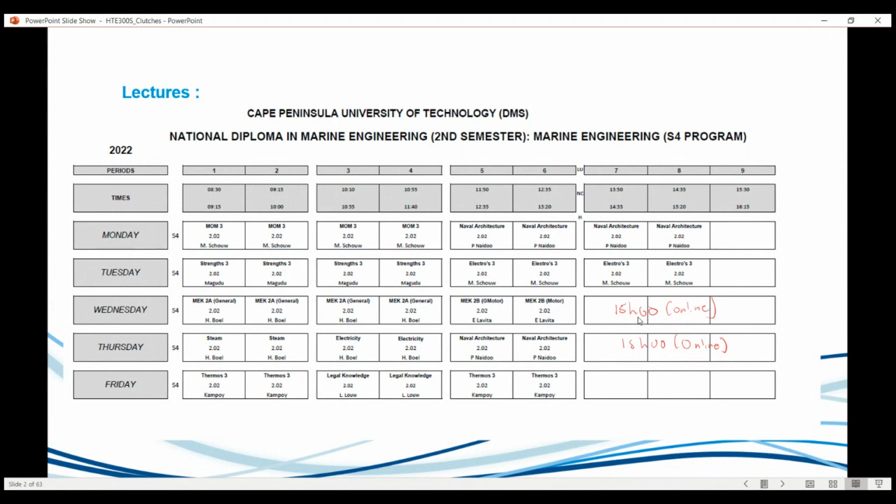My consultation times for our repeaters: Monday after class you can engage with me on WhatsApp, email, and I can assist you. So try to work ahead, if you have a problem or two, you can just send it to me. We can discuss on Tuesday, that's in the mornings. I should actually sound available that day because I use the morning sometimes for prep. Wednesday and Thursday is from 12 to 4 as well.

Friday I'm unavailable. I should actually put unavailable on Tuesday. But nevertheless, you guys should always pop my WhatsApp and I'll respond. Even on the bloody weekends you guys still bother me, but please try to respect my times. Always just send me a WhatsApp if you're battling with anything, I'll attend to you probably during those times.

Okay, so for the guys who weren't here last semester, hi, Mr. Sima, good to see you.

Just a reminder to let you guys know what we covered - 7 topics, and it was quite dense, a lot of concepts being thrown around. We did inertia, systems with friction, relative velocity, centrifugal force. We looked at conical pendulums, governors, balancing, vehicle stability - a lot of basic stuff - and mass moments of inertia.

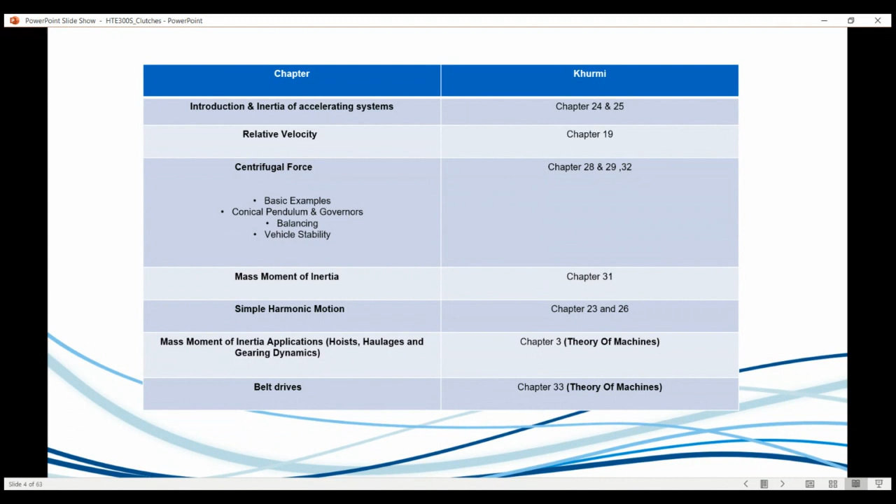So Heat Engines 3 is essentially a continuation of MOM 3, but at the same time it's the second half, which rearranges things a bit. It incorporates small concepts from the previous semester. For instance, in shafts, you'll be using - which I'm quite excited to teach because it wasn't part of the syllabus I did last semester - you'll need to do your shear force and bending moment diagrams, and use your torsion equation to find the diameter of the shaft.

For instance, in energy systems, it requires you to know rotational hoop stress, which is sigma equals - a function of the density of the material and the velocity squared. If you guys recall that in thin-walled cylinders. Inertial forces incorporate some thermodynamics as well, and some stuff on machines.

There'll be no really finding mass moments of objects. Typically at this level, mass moments will be given to you as a value, assuming you understand what it means - in the context that something with more rotational inertia or mass moment of inertia will take longer to rotate. When you do analysis, it'll give you an idea.

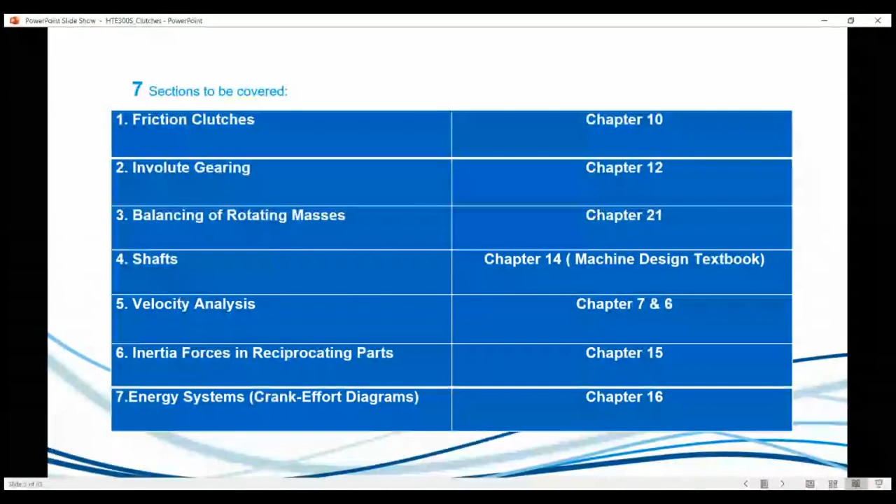Recommended textbooks - I've shared this on Blackboard, the Theory of Machines one, and the N6 textbook from Peter Toit. I've shared the relevant sections there for you. There are other recommended textbooks that all deal with theory of machines, so you've got the whole textbook there. If you like a hard copy, I recommend printing out the individual chapters of the textbook I've sent, or this one, and put it in a lever arch file - that's what I'd recommend if people really want a hard copy.

I'll be talking for too long, guys - you know, we work here. Cool, so that's that, I think that's kind of clear.

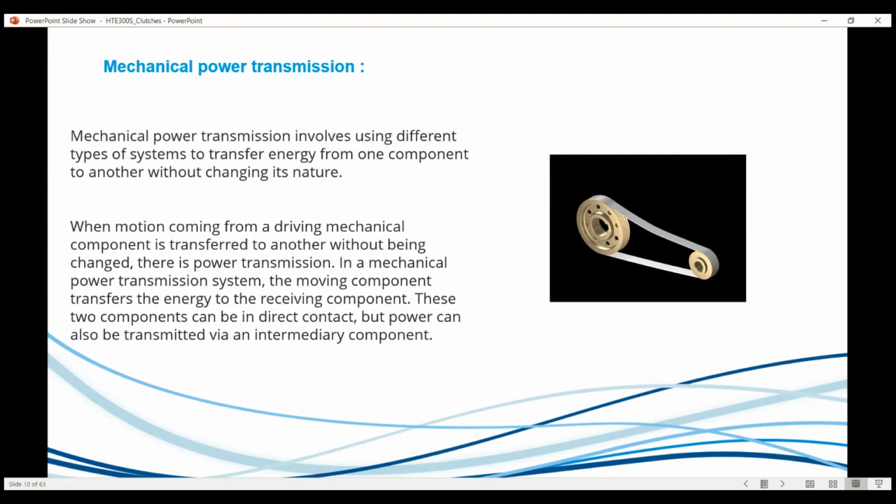When motion coming from a driving mechanical component is transferred to another without being changed, there is power transmission. That's the idea - we're transmitting power in the mechanical power transmission system. The moving component transfers energy to the receiving component, for instance the pinion and the gear wheel, or the smaller pulley to the big pulley. These two components can be directly in contact, but can also be transferred by intermediary contact - in this case, the belt drive acts as the intermediary component.

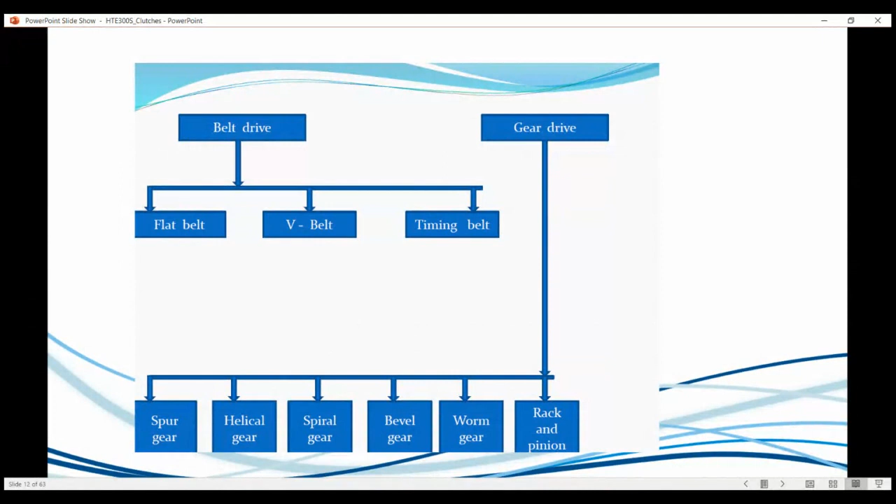So classifying and breaking it down further: transmissions or mechanical drives - positive drives where no slip occurs, such as chain drives and gear drives, and frictions where you've got belt drives and ropes. Belt drives can further be broken down into flat belts, V belts, and timing belts - that forms part of flat belts. Then on gear drives, you've got a whole range of types of gears, which I don't think we're looking at all the different types, since this isn't a gear type course, but anyway, that's under that.

So just to give you an idea of what all of this is, before I go into all the theory and how we model the stuff, I'd like to ask all the experienced engineers, and maybe not so experienced engineers - have you guys worked on clutches? Is clutches important in a marine engineering domain? What is your experience with clutches as a marine engineer? I'm opening the floor to anyone.

Mr. Plachis, do you want to go first? Or Mr. Zita? Who's worked on clutches? Mr. Beard, Budalalo, Mr. Sima - anyone? You guys know what a clutch is? You haven't seen a clutch before?

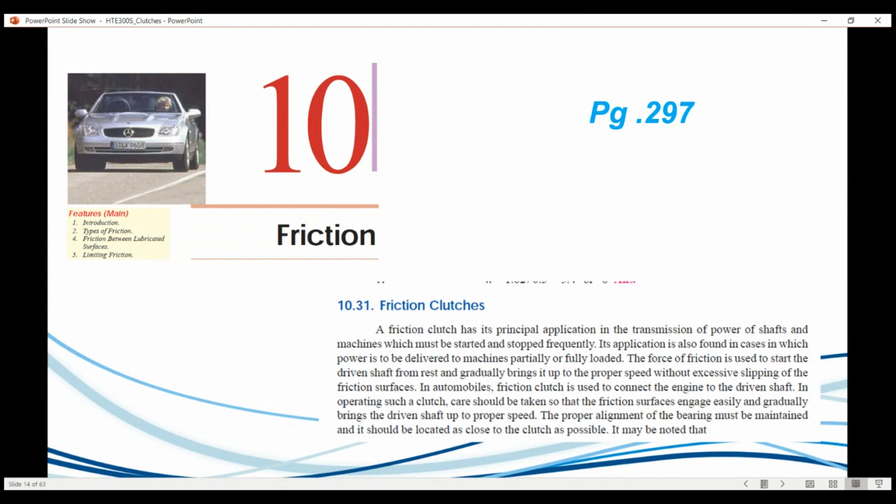Okay, so in your textbook, shared on the blackboard, it's chapter 10, and you have to go to page 297 where it starts on clutches. So that's if you want to follow along, because I've kind of gone with that flow. Not really, but yeah, that's the text.

Yeah, this is some images. Okay, so what is a clutch? I think I'll refer back and forth to these things.

A clutch is a device used to transmit torque. So just like I mentioned in the introductory part, it's all about mechanical power transmission, and it's used to transmit torque between two co-axial shafts. It enables the shafts to be engaged and disengaged while at rest or in relative motion.

So basically, what this means is you could have on the engine side the flywheel rotating at a specific amount of torque at a different speed, and then the driven shaft on the other side. Basically, the clutch is intermediate between the two elements to make them rotate at the same speed, and it transmits the torque.

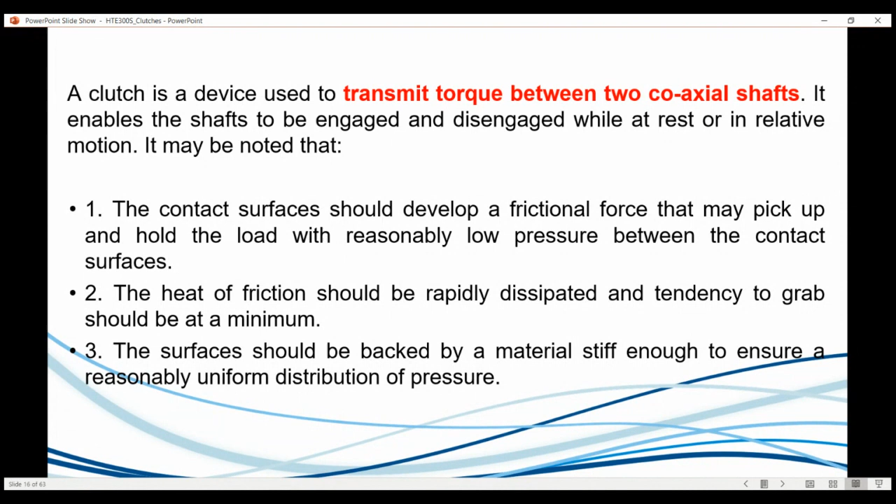Nevertheless, for this to happen, the contact surfaces should develop a frictional force that will pick up and hold the load with a reasonably low pressure between the contact surfaces. The heat of friction should be rapidly dissipated and tendency to grab should be minimum - we don't want too much heat. And the surfaces should be backed up by a material stiff enough to ensure a uniform distribution of pressure.

Some more definitions on this. Okay, it's just like a gear train moving back and forth, engaging and disengaging. A clutch is a machine member used to connect the driving shaft to the driven shaft - again, with the engine side and the flywheel, and then the driven shaft on the other side.

So that the driven shaft may be started or stopped at will without stopping the driving shaft at all. So we don't want to stop the stuff - one will be rotating and we're able to make the changes. A clutch thus provides an interruptible connection between two rotating shafts. Hence, it's a key element in changing gears.

Clutches allow high inertial load to be started with small power. That's quite interesting. And also, a popular application of clutches is in motor vehicles, where it's used to connect the engine and the gearbox - that's the primary form of a clutch device now. But in more modern electric vehicles, they've eliminated transmission completely, and that's why mechanical engineers in the automotive industry will lose their jobs, because we work with motors basically coupled to the wheels now, and we directly control the motors through VFDs, variable frequency drives, and there's no need for transmission anymore.

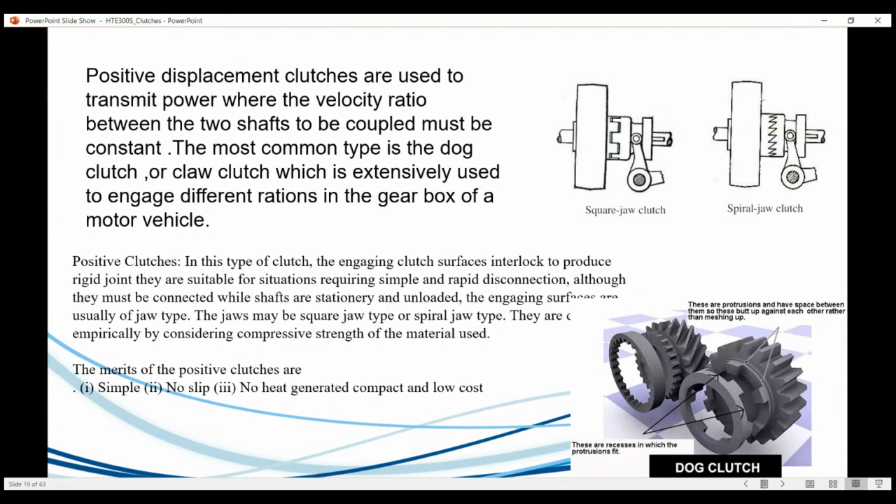Just for noting really what a positive displacement clutch actually is, but we'll be looking at the friction types instead.

So friction clutches, like I mentioned, are classified into plate clutches - single and multiple - which we'll be looking at, cone clutch, thought of throwing that maybe in there, I'll see how it goes, and then centrifugal clutches, which we won't be looking at but I'll mention again. It's also part of the syllabus but it's kind of overkill. Then there are two different parts, which I'll talk about now.

So two shafts not running at the same speed. What's going to happen with the clutch is that slipping will occur between the two shafts when the clutch engages, until they're brought to the same speed. Super important thing to understand because we're doing the maths behind this. Once this happens, torque will be transmitted, and then no slip occurs unless the limiting friction force between the surfaces is exceeded, which typically doesn't happen, but it does happen sometimes - that's when you hear your clutch slipping.

So one thing to keep in mind: we're going to look at the analysis of a clutch individually, and then we're going to look at it holistically from a mechanical dynamic perspective, where we incorporate the inertia and stuff - that's the fun part, which I like. So two different shafts rotating at different speeds, different torques - the clutch basically marries them together. Some friction occurs, some slip occurs, and eventually it doesn't slip, and then eventually they all rotate the same, in harmony.

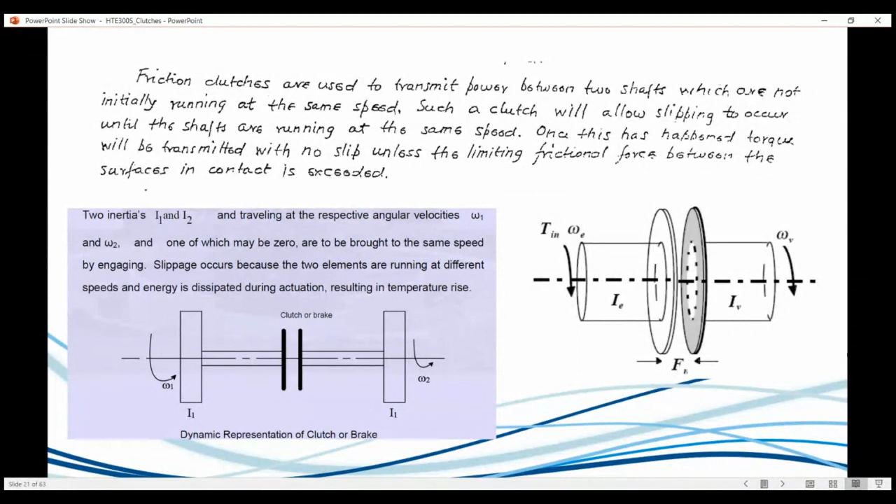Okay, so again, this construction of a clutch, just to get people aware of this before we get to the maths. The clutch has essentially three parts: the flywheel - the engine flywheel - obviously everyone's aware what the flywheel does, it provides energy. We're going to be looking into flywheels fairly in depth, not only for automotive but also for marine type applications. It provides energy during certain strokes when there's no energy - this work is only done during, for instance, the expansion stroke, and there are parts where it balances out the work fluctuation. Nevertheless, there's also the friction disc, called the clutch plate, and the pressure plate.

This says when the engine is running and the flywheel is rotating - so the flywheel rotates with the engine, that's how it's typically done - the pressure plate also rotates, which is attached to the flywheel. The friction disc is located between the two. When the driver pushes down the pedal, so when you're pushing down your clutch pedal, it's released, and the action forces the pressure plate to move away from the friction disc. Then there are air gaps in between the flywheel and the friction disc, and between the friction disc and the pressure plate as well, and then no power can be transmitted - that's when you're pushing on the clutch.

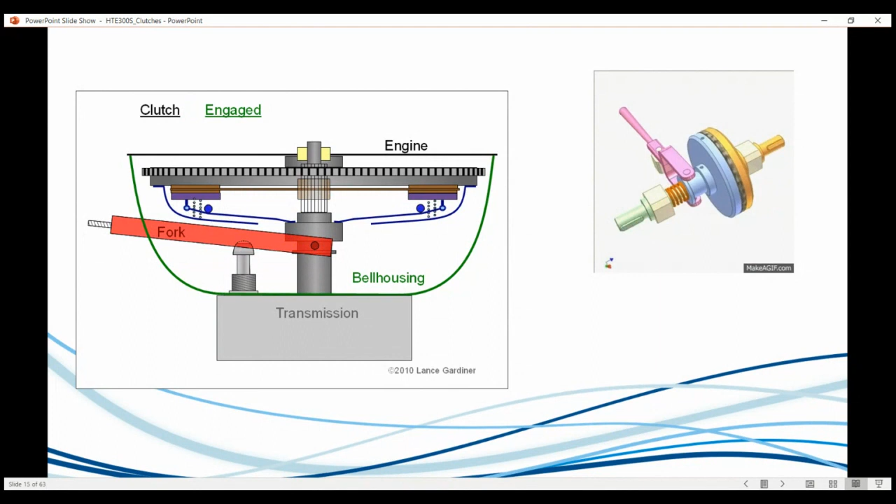This is just showing when it engages and disengages. Looking to one side, that's when they go apart, and then that's when they come together. So that's a very basic illustration of what's actually happening there.

This is what the system looks like from the side, where you have your driving shaft and your driven shaft on the one side. The driving shaft is always from the engine side, put at its own torque, at its own speed. Flywheel's there, and on the left hand side we have the disengaged part of the clutch, and on the other side that's where we engage the two together, and that's when slip occurs, and eventually the torque can be transmitted from the driving shaft to the driven shaft. That's what should be running through your mind all the time.

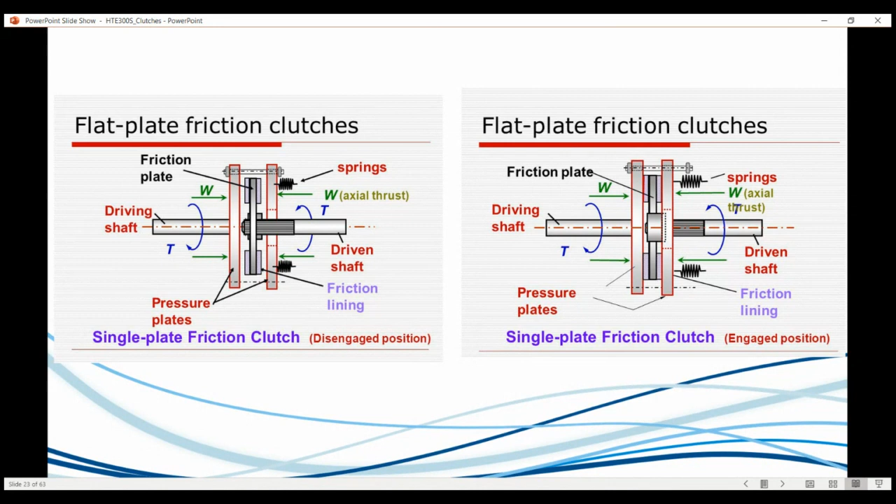There's an axial force, or axial thrust as I say, which is being produced essentially due to the springs. The springs transmit that force coming through there. We will be doing some analysis on that.

Okay, so let's get to the fun part. We're going to start doing some calculations. The method of analysis, which is essentially the core of this course, is: torque can be transmitted by a clutch, and it's a function of geometry, the magnitude of the actuating force applied, as well as the condition of contact prevailing between the two surfaces. The applied force can keep the members together with a uniform pressure over the contact area, and its consequent analysis is based on this uniform pressure.

In fact, there are two types of theories we're going to look at: the uniform pressure theory and the uniform wear theory, just to give you an overview of what's happening.

The first theory - I want to use the word 'new'. So when you buy a new clutch and you insert it, the prevailing theory would be the uniform pressure one. What does the theory state? You're not going to tell me in words - you'll be using calculations for this theory - but it's just the idea so you can understand what it means. So the uniform pressure theory assumes that the pressure is distributed uniformly over the frictional surface, the surfaces essentially in contact.

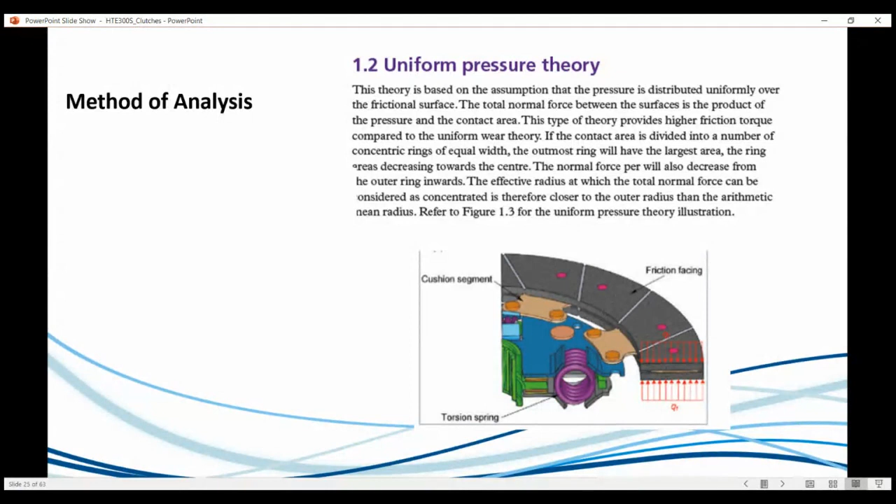Okay, the other one is the uniform wear theory. In this case, assuming that the fit between the contact surfaces is perfect, the normal intensity of the pressure will be equal at all points of the contact surfaces. This theory is relevant to worn clutches because wear is uniform over the contact area from the inner radius to the outer radius. So when we're dealing with old or worn clutches, this is the theory. Some of you haven't done your service yet - if you want to see how much torque you're producing, you have to use the uniform wear theory.

And essentially what it means, if you look at the sketch at the bottom, is that the pressure is not uniform across the whole thing. What's important to note is that the rate of wear between the contact surfaces depends on the intensity of pressure as well as the velocity of the rubbing between the surfaces. Basically, the wear is a product of the normal pressure and the rubbing velocity.

This implies that the maximum pressure occurs at the inner radius, and they say P times R equals C. So for this theory, the pressure is not uniform and it varies from inner to outer. What's important here is that if they don't state which theory to use in your analysis, you have to use uniform wear. I typically tell you which theory to use.

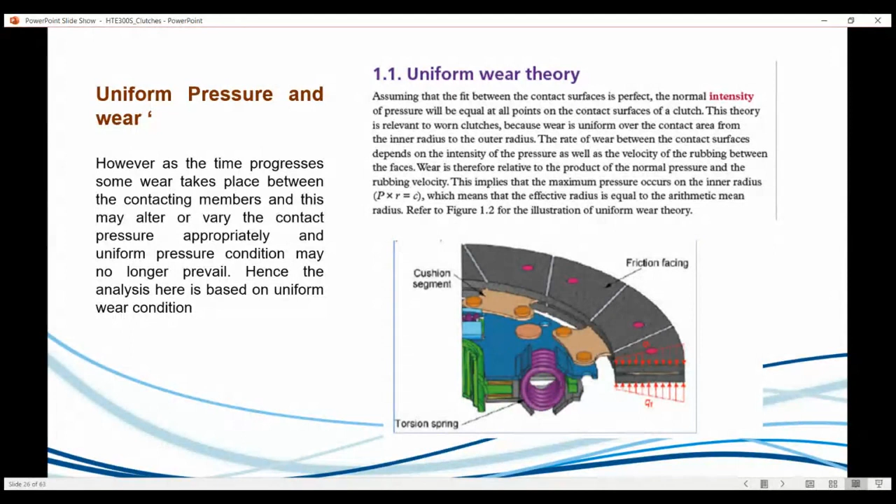So this is the other theory. They say however, as time progresses, some wear takes place between the contacting members, and this may alter or vary the contact pressure appropriately, and uniform pressure condition may no longer prevail. So then that's when we use uniform wear. That's just back to the two types.

Okay, get into the analysis part now, the equations and all the fun stuff. So what you have to master is these two theories, then obviously apply them. First thing is first.

To calculate torque on the clutch, we use that formula at the top, which is N, the number of frictional surfaces, mu, the coefficient of friction, W, which is the axial thrust, and R, some mean radius. So that is a general formula for torque transmitted of clutch.

What changes is W and R depending on which theory you're using. I hope that's clear, so I'll say that again. The general formula for torque basically is W times R, which is essentially force times radius, times N times mu.

And what changes depending on which theory you use is, whether it's uniform pressure or uniform wear, the W and R. So what do I mean by this? For uniform pressure, to find the mean radius, it's 2/3 times R1 cubed minus R2 cubed, which essentially means outer radius minus inner radius, all cubed, divided by outer minus inner squared. That's the first thing.

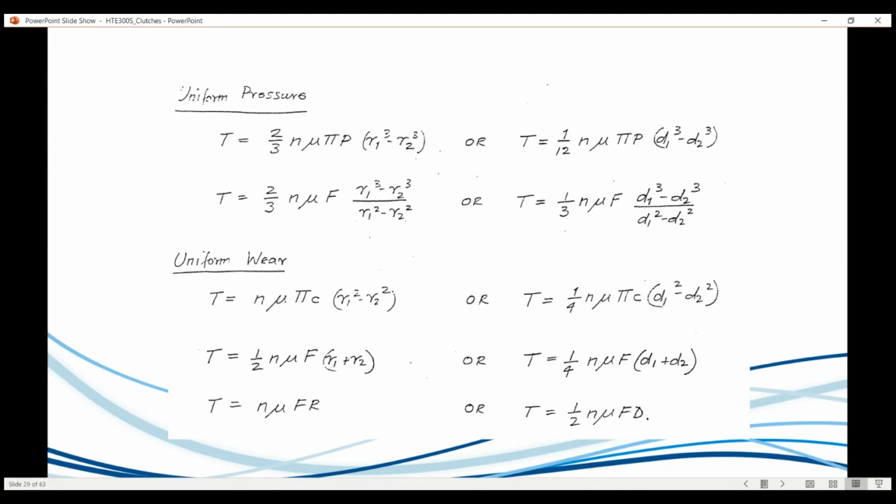I mentioned this to you, so I'll demonstrate this. These are additional formulas - you don't actually get them, but I modified them to make it a bit easier to use. I don't typically use them because I remember the older ones, but these make things simple for you to remember. You can calculate the torque immediately if you have all this. They basically arrange diameter and radius, or radius and diameter - I think we can see that there.

Anyway, let's hone in onto clutches, right? So we've talked about what a single plate clutch is: pressure plate, flywheel, clutch plate.

Let me just read this to you. Basically, it's a friction material, usually Ferrodo. I'm sure you guys have seen it before. It's mounted on the hub, which is free to move along the splines of the driven shaft, so it can move back and forth. The pressure plate is mounted inside the clutch body, which is bolted to the flywheel. Both the pressure plate and the flywheel rotate with the engine crankshaft, and all of that has its own inertia, or the driving shaft.

The pressure plate pushes the clutch plate towards the flywheel by a set of strong springs, which are inside the body - we can see that over there. Typically there are 2, 3, 4, or typically 6 springs. Those springs, we'll find the magnitude of the force within those springs.

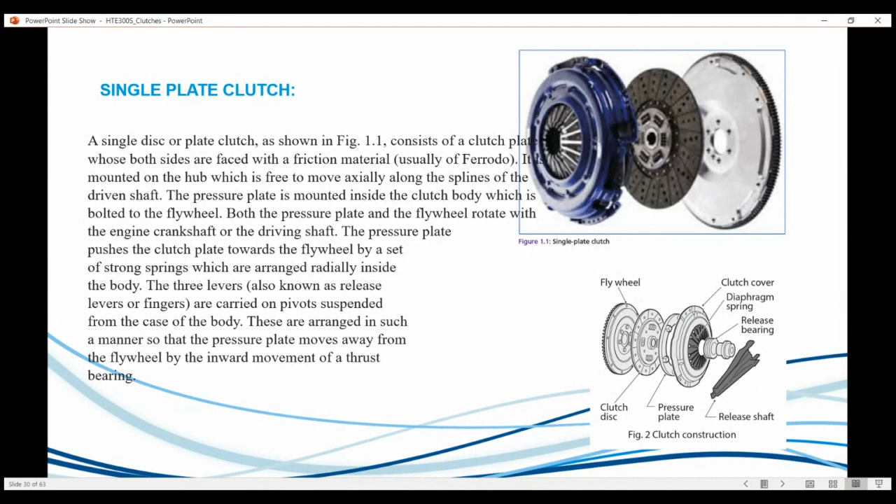And the release levers, or fingers, are carried on pivots suspended in the case of the body. These are arranged in such a manner that the pressure plate moves away from the flywheel by the inward movement of the thrust bearing - the release bearing I was talking about. You can actually use the same formulas for thrust bearings and things like that, but nevertheless, that explains the bearing moving back and forth.

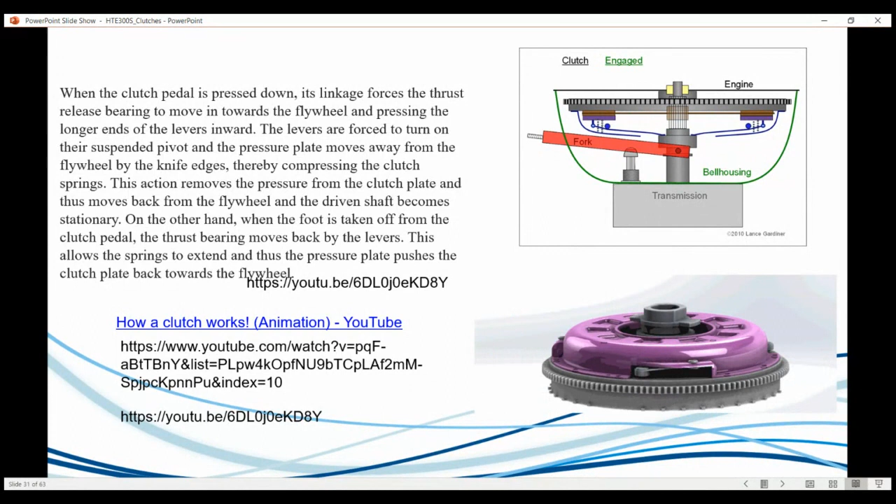I don't want to talk too much - we can always come back here if we need, but we get a general idea of the bearing, engaged, not engaged, that kind of thing. That's what's happening. Flywheel, clutch plate, pressure plate, all together in one assembly. I've left some links for some YouTube videos you can have a look at. I think I explained it adequately, and we can carry on.

Yeah, so the last note in terms of words and stuff - let's consider the clutch plate. This is in regards to the surfaces. It consists of 3 plates: the flywheel, the friction plate or clutch plate in the middle, and the pressure plate. There are 2 pairs of surfaces in contact: one on the flywheel side, on the clutch plate side, and the other side is one on the pressure plate. Depending on how many plates we have, we can work out how many surfaces are in contact.

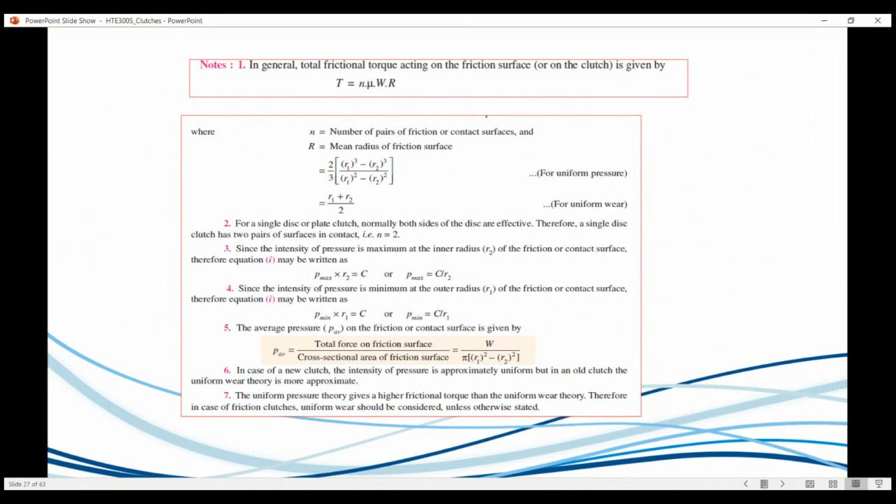So for a single plate clutch, we have 3 number of plates. 3 minus 1 gives us n equals 2. Hence, that is why 2 will always be the number you're going to use in that formula, n mu W R. When it comes to a multiple plate clutch, which transmits more torque, n is not always 2, but that's where the n equals 2 comes from. Between the flywheel and clutch plate, that's one surface; between the friction plate and the pressure plate, that's another surface.

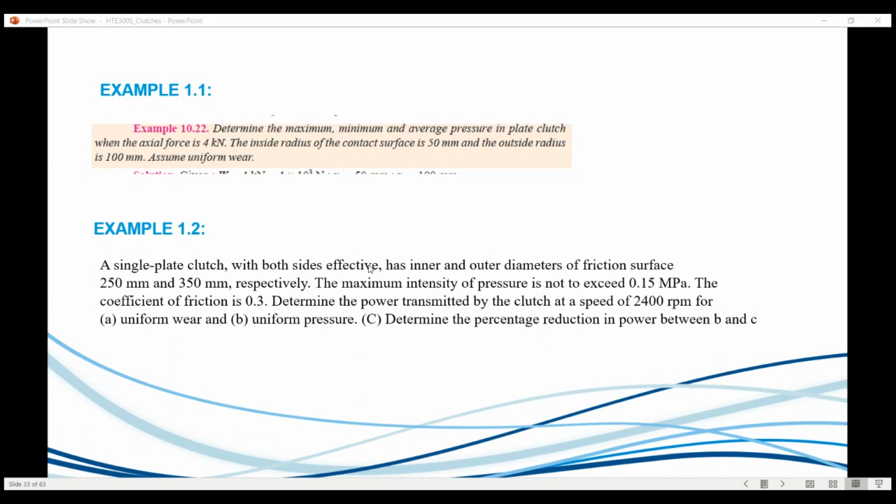So let's finally start on an example. Is there any questions, students, before I move on? I know it's a bit of a mouthful, eh? It's been a while. Any questions? Am I free to proceed with solving our first two examples? Don't worry, I've got some work for you as well.

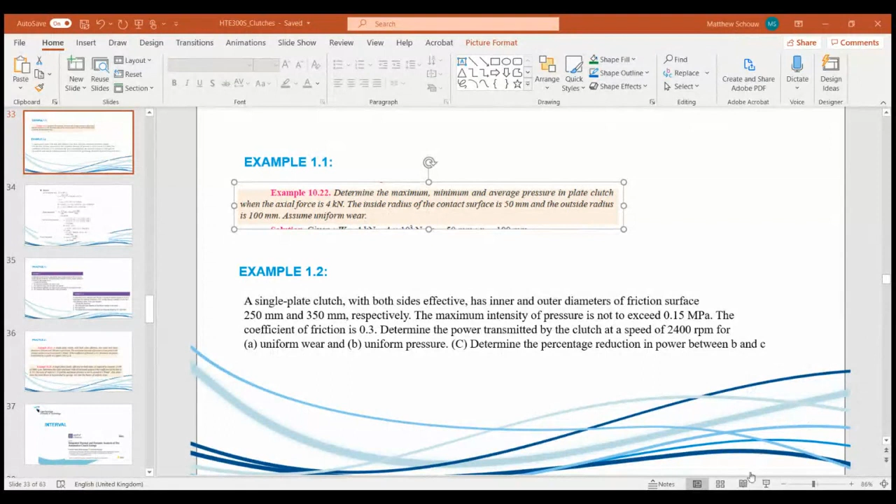Fantastic, cool. So now we get to the fun stuff. We're going to be solving problems using the UP and UW theory. I've got two problems for you, and then you get one for yourself to solve. Nice and easy chapter, nice and easy.

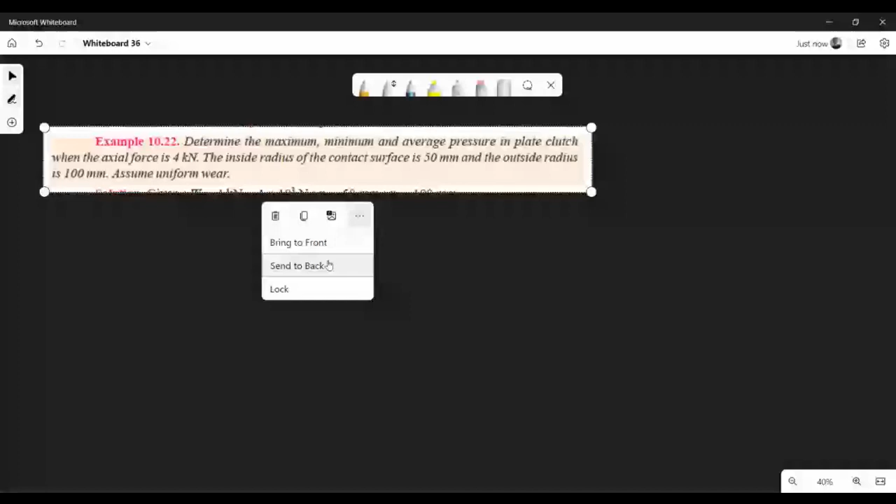Okay, so I'm going to do the first one, just to get you acquainted. I'll just reshare my thing. I'll do these two examples, and we can take a break, and then you guys can do one and see if you're feeling it or not.

Oh yes, by the way, this is in the textbook, let me just check the page double quickly. So it's page 302. I'll give you guys like a minute to find it, and then we can start solving it. But it's a very basic thing. Then we'll get to the crux of the matter. So yeah, page 302, I said.

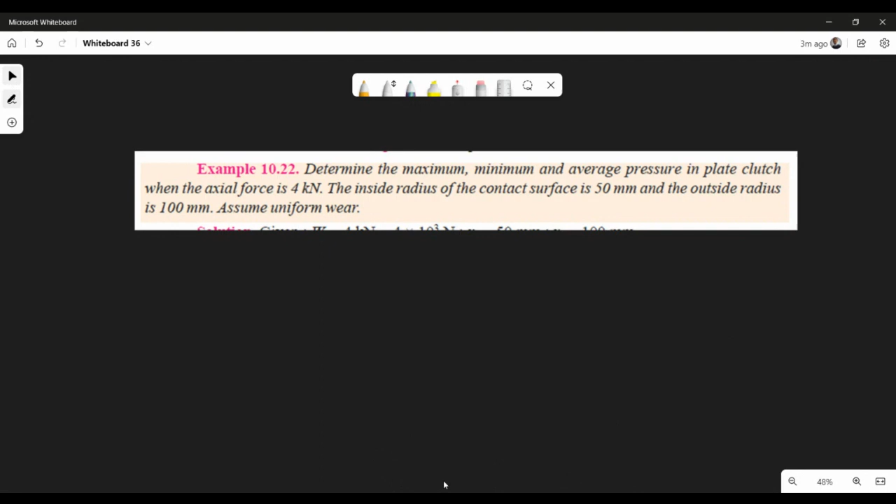Let me close a few things here. Too many things open. Cool, close. Open, close. This. Okay, cool, I think you guys can still see this.

Yeah, so what the question asks: determine the maximum, minimum, and average pressure in the plate clutch with an axial force of 4 kilonewtons. The radius of the contact surface is 50 millimeters, the inside radius, sorry, and the outside radius is 100 millimeters.

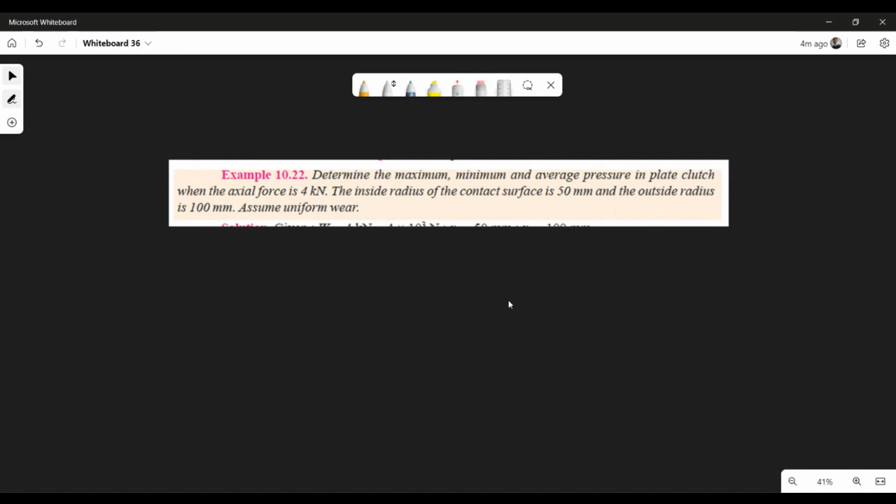So again, this is just a very small demonstration. I'll start to sketch this for you.

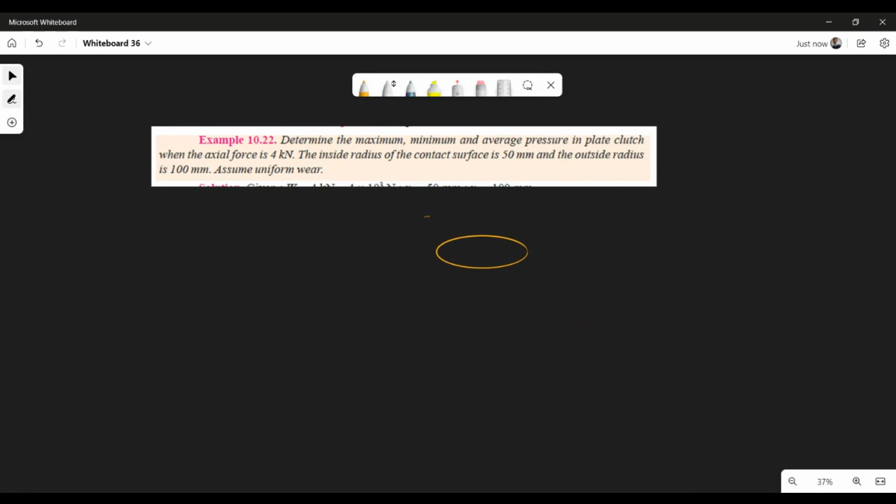Oh man, is my tablet not on again? Let me just give me a moment. I can feel it's misbehaving. Yep, it's not linked. Aren't you linked? Just give me a moment. Yeah, it's not linked. Man, what's going on? Okay, just give me a moment. Just give me this telephone. Okay, there we go, looks like it's back. Where are you now? Okay, I can't see the cursor for some reason. There we go.

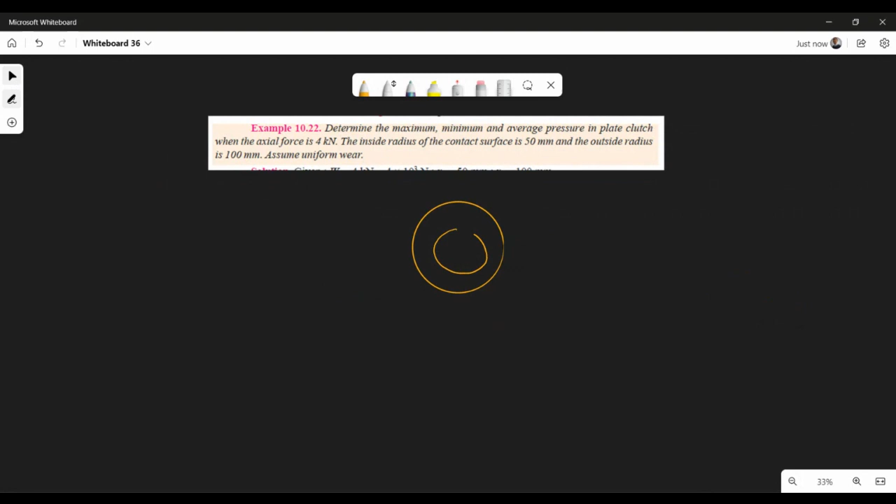Okay, cool, everything's working, happy. That's so cool. Can you guys see? Let me just look small here.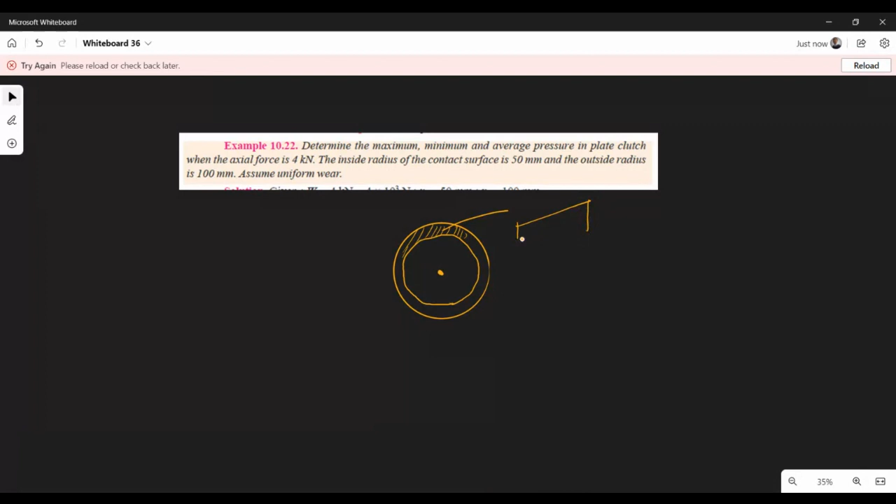So across that friction surface, like I said, the pressure is not uniform in this case because we're dealing with uniform wear, right? And I should rather have it this way, where it decreases like that. It's like a UVL of some sort. Very basic stuff here, nothing crazy.

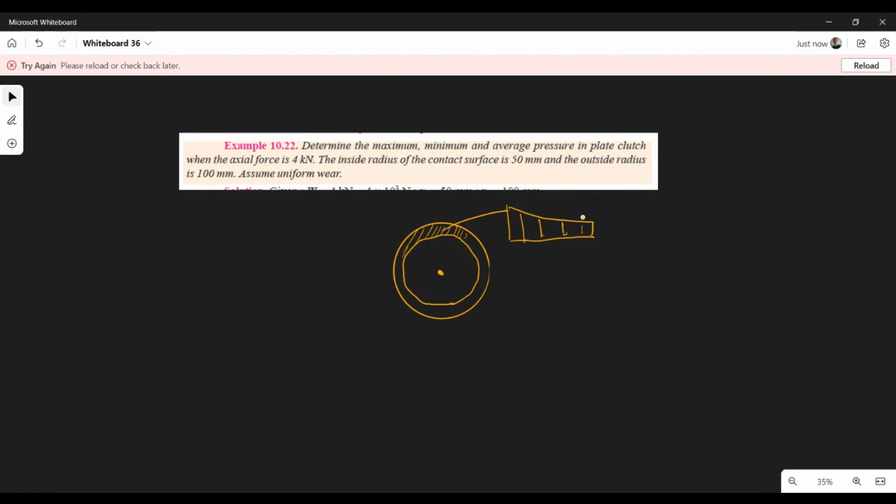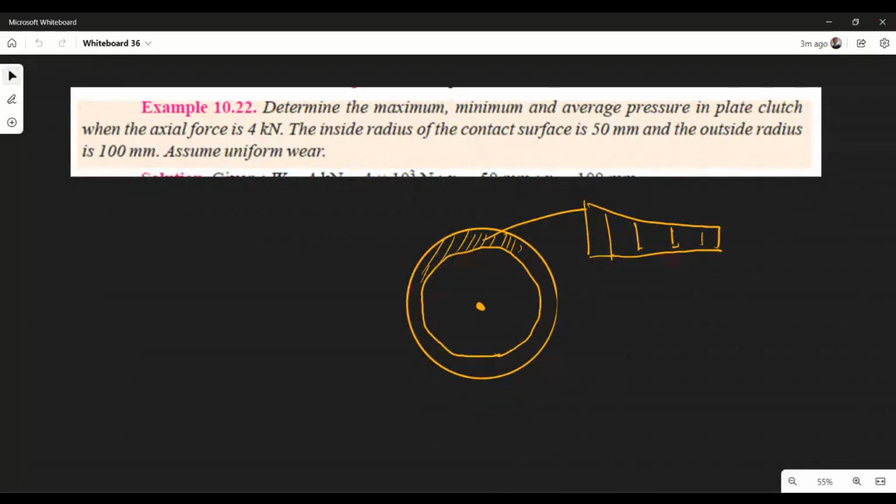Can you guys see my whiteboard? I'm just concerned, no, I didn't reload. Okay, I'm not exactly sure what's happening there. Okay, cool, that looks a bit better. Yeah. Nice, okay, cool.

So the formula in question here, right? If I can revert back to the slides, I want you to just be aware of the two formulas. So I'll write it here again.

So for uniform pressure, which obviously isn't the one we're using now, and this is for uniform wear. I just want to get them down quickly. So these are formulas you have to know. Uniform pressure, it's going to be...

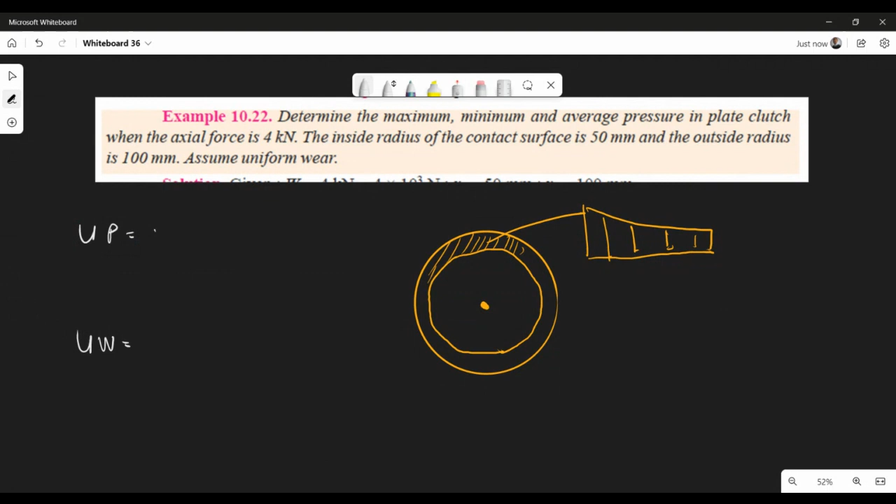W is, all of this is basically force equals stress times area, this is what they all are. For UP, it's going to be pressure multiplied by pi R2 squared minus pi R1 squared, so you'd find it there. Just get this right. R2 squared minus R1 squared, this is obviously outside minus inside. This is for uniform pressure, right?

For uniform wear, I should have rather written it like this.

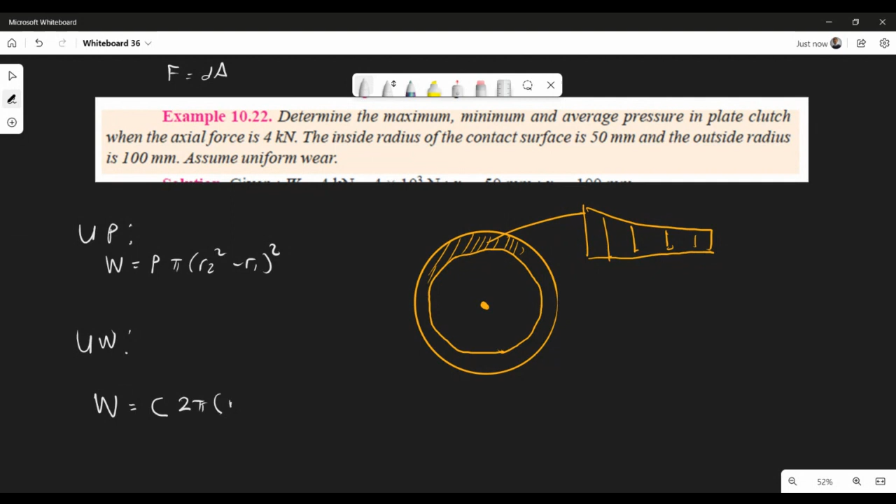So for uniform wear, your W now is C times 2 pi, times R2 minus R1. I just want to bring that to your attention, the difference between the two formulas. Like I mentioned, the general formula will be N, mu, W, and R. So depending on which theory you use, you have a different axial thrust formula and a different radius type formula. I just want to make you aware of that. But here, C, which they call the intensity of pressure, essentially equals P times R. I'll explain what all of this is. The C value doesn't typically change, but in this particular problem, yeah.

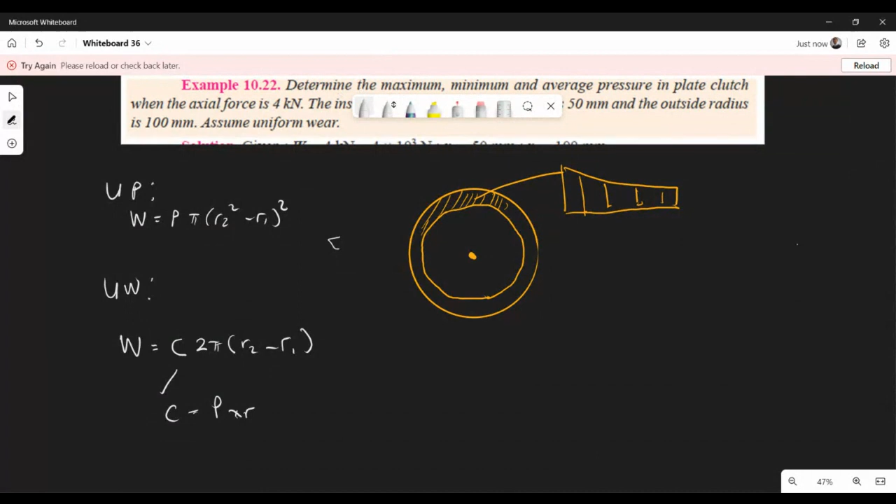So what we're doing now, they want uniform wear, so this is the formula we're using. Let me close this here. I'm going to ignore that. So this is what we're using, and we are essentially looking at finding the values over here and the values over there.

First thing is first, they want the maximum, minimum, and average pressure. The maximum pressure occurs from the inner radius, so this will be R1... wait, no. That's R1, that's R2. R1 is the small one, R2 is the bigger one, or other way around - let's call it other way around. So R1 is the outside, and R2 is the inside. Like I said, this isn't a typical problem, but just an idea of using this intensity of pressure concept.

So to find Pmax, C equals Pmax times... what's my inside radius? My inside radius is 0.05. So what we're looking for is Pmax here. We're going to take the intensity of pressure and substitute it in. Our axial force, given by our springs, is 4 kilonewtons. C in this case is Pmax times 0.05, times 2 pi, times outside minus inside. Since these values are different now, it should be R1 minus R2, so 0.1 minus 0.05. Just have to change it up a bit.

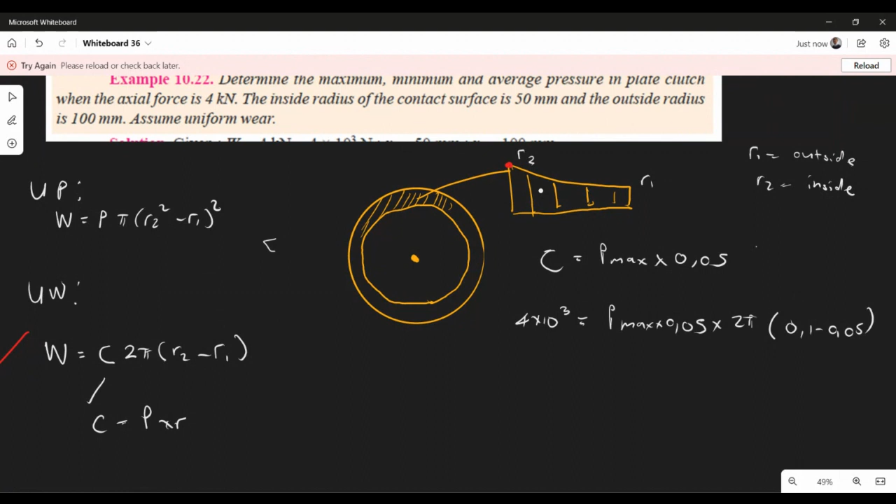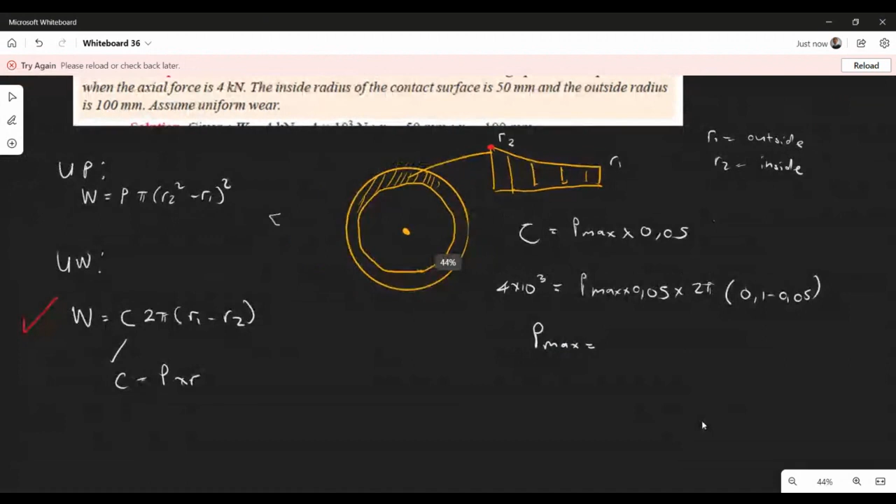Okay, cool. Can someone find me Pmax please? We call it outside is R1 minus R2 - same thing, yeah we get that. It's outside minus inside. So what is my Pmax value? Are we all on the same page here? Are you guys following, or are you guys lost? Page 302. Mr. Jamili, what's my Pmax? Guys, get Pmax?

Yep, that's correct, and that'll be in Newton per meter squared, or kPa. So here we have 254.65 kPa basically - that's your highest pressure over there. R2 is on the inside. So we know over here we experience a pressure of that much, arguably.

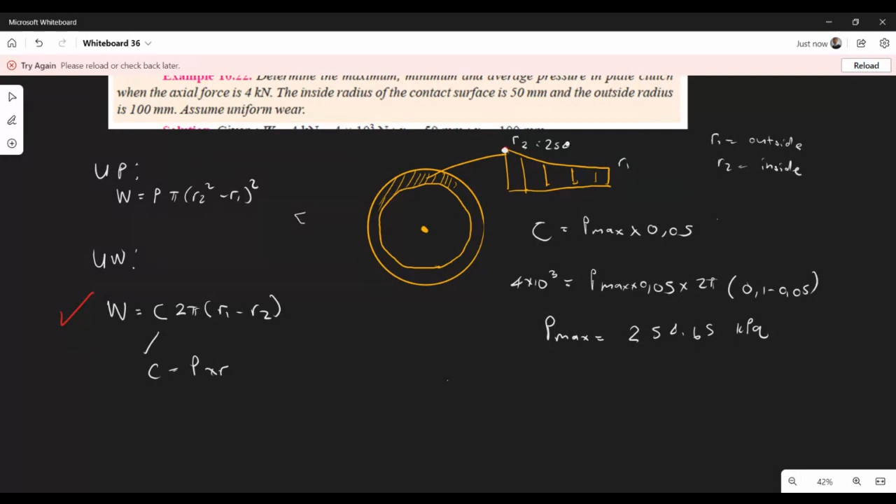So then we do exactly the same thing for the minimum. C equals Pmin times R, but we know the minimum pressure will occur on the outside radius, and in this case the outside radius is 0.1. We do exactly the same thing, same axial force: Pmin times 0.1 times 2 pi times 0.1 minus 0.05. Same thing - so what's my Pmin? What's the minimum pressure? This could also be expressed as pressure equals force over area.

Just by the way, if you are... let's see, Paul, what is my Pmin? Get into uniform pressure and wear now - don't worry, this is just a warm up.

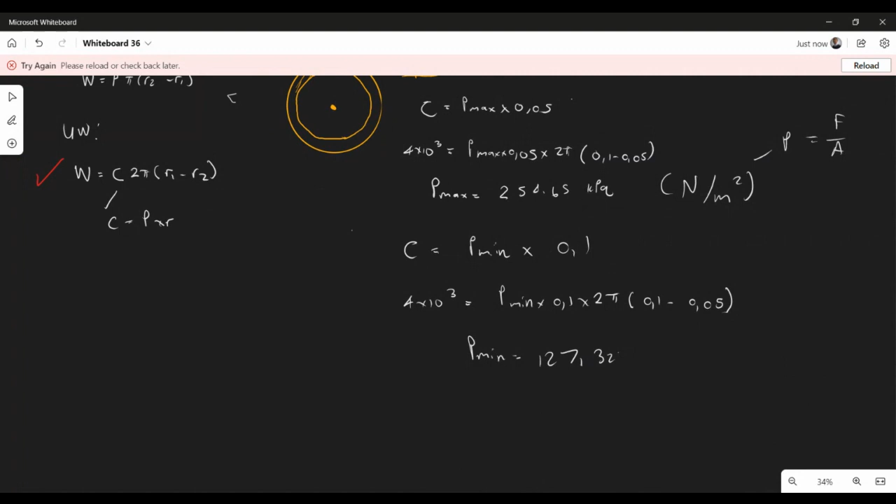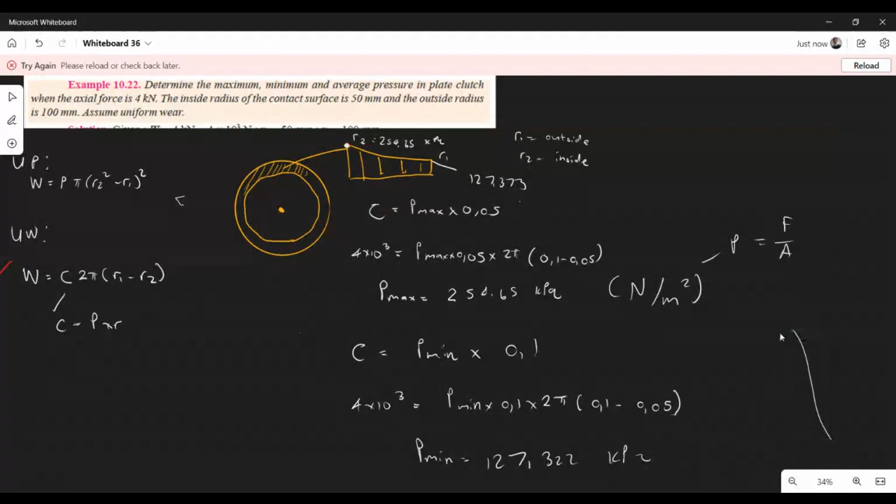What's that, Pmin? Guys, come on man, let's move. Yep, 127.32 kilopascals - fantastic, there we go. 127. Nice guys, 322. And what this essentially means is that on the far end, we get a pressure of 127.373, or whatever it is.

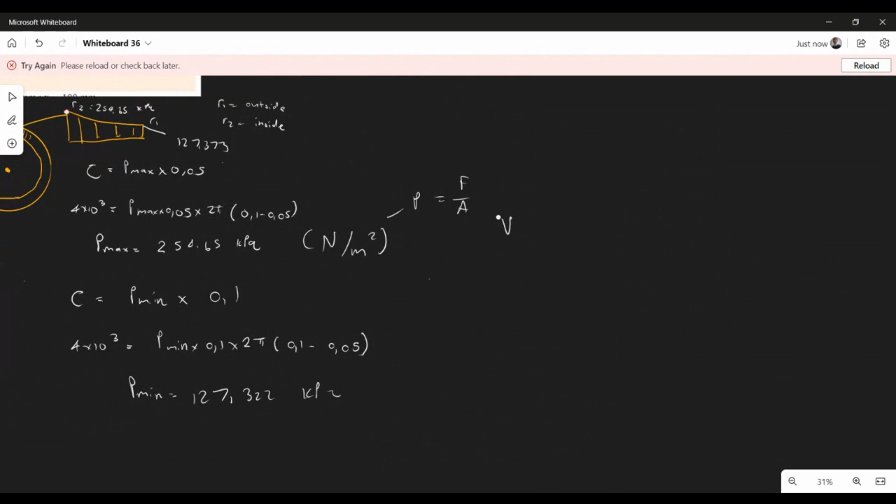So that's just to demonstrate how the pressure is changing on the friction surface, especially using the uniform theory - it's not uniform at all. And the last one, they want the average pressure, which you essentially just find using standard force over area. Now that's not typical, but just to find pressure, it's force over area, using basically the cross-sectional area of the contact surfaces. In this case, it's just 4 kilonewtons divided by pi r squared, pi times outside minus inside. Not really important to me, but if you do find it, you're going to get around 170 kPa.

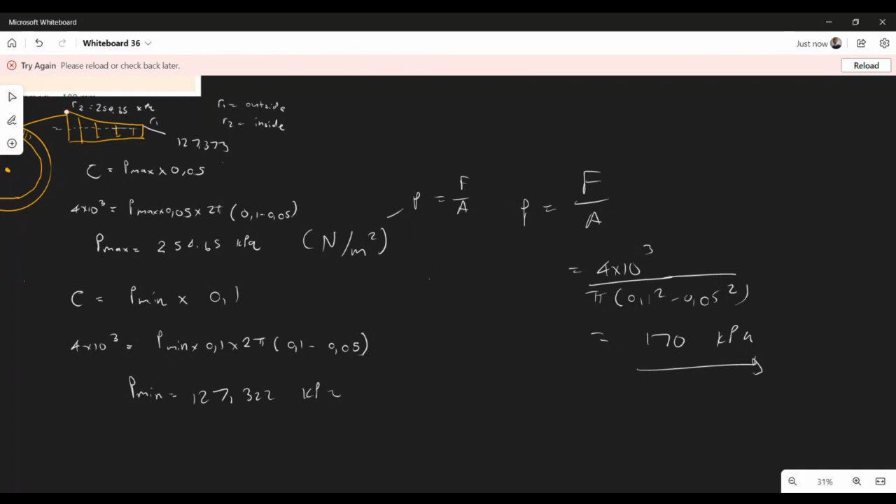So that's like the average pressure, arguably - like a line we draw across the two. What I do want to make you aware of is that using this formula is exclusively for uniform pressure, where the pressure is uniform, so you don't need to worry about this.

However, when you're using uniform wear theory, you need to use your P max. Please don't make the mistake - I've seen students make that mistake. You have to use the maximum pressure in the uniform wear theory. We don't work on the minimum value.

When you're using uniform wear theory and you find a C value - it's going to be for 2 marks typically - you have to find P max. The C, which is the intensity of pressure, you typically have to find anyway. They'll give you P, then you have to times it by the radius, but you have to use this. Super, super, super important for uniform wear.

Just making you aware, you don't use a minimum pressure. If you times by the wrong radius, you lose a lot of marks. So I'm saying it again: make sure for uniform wear, when you have to calculate C, which is the intensity of pressure, make sure you calculate

using the minimum radius. Is it clear to everyone? Is everyone on the same page? Is it clear, students? Fantastic.

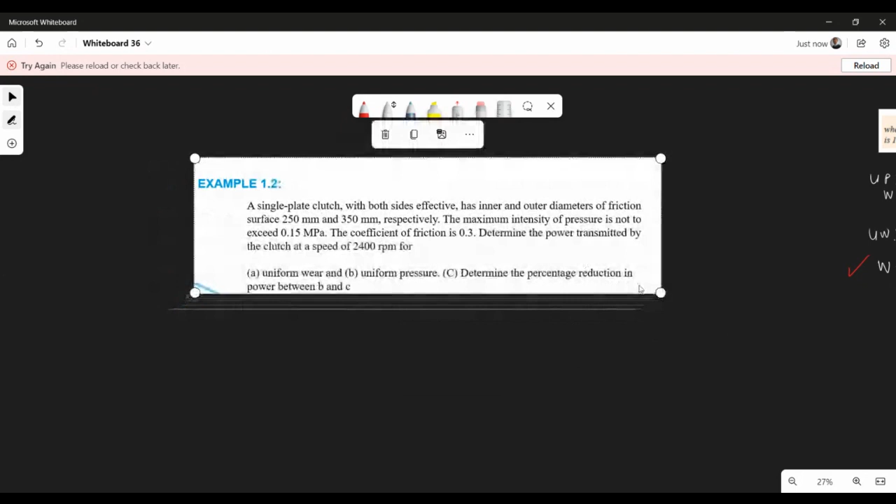Nice, okay, I hope you guys see this. Let me zoom in a little bit more for you guys. So you might ask me, sir, do I have to know both theories? Yes, you do have to know both. Some questions may call for both, some questions may call for one. It's part of the game of learning where you have to identify which formulas are appropriate for what particular application.

Okay, right, so this is the question. A single plate clutch with both sides effective - obviously that means N equals 2 - with inner and outer diameters of a friction surface of 250 and 350 respectively. They typically give it - sometimes you have to work the diameters out, but here they give it. The maximum intensity of pressure is not to be exceeded by 0.15.

So that value is P, right? We still have to find C, which is the intensity of pressure - just ignore my words there - but it can't be more than 0.15. The coefficient of friction is 0.3, yes.

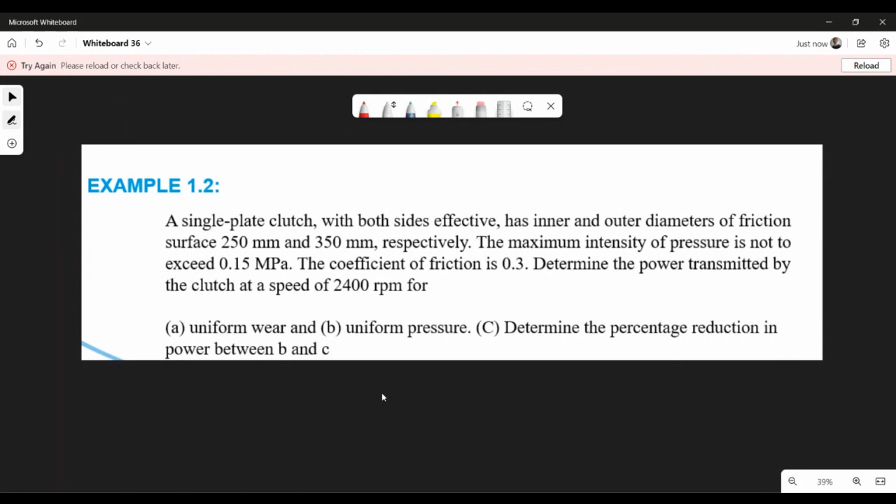Determine the power transmitted by the clutch at a speed of 2,400 for uniform wear and for uniform pressure. Then determine the percentage reduction in power between the two. I think I asked this question in the final, if I remember correctly - not exactly like this, but something around this kind of way. Cool, so I hope that's clear to everyone.

So we start with uniform wear, right? Okay cool, just get my thing - my white pen. Cool. So we'll be going uniform wear.

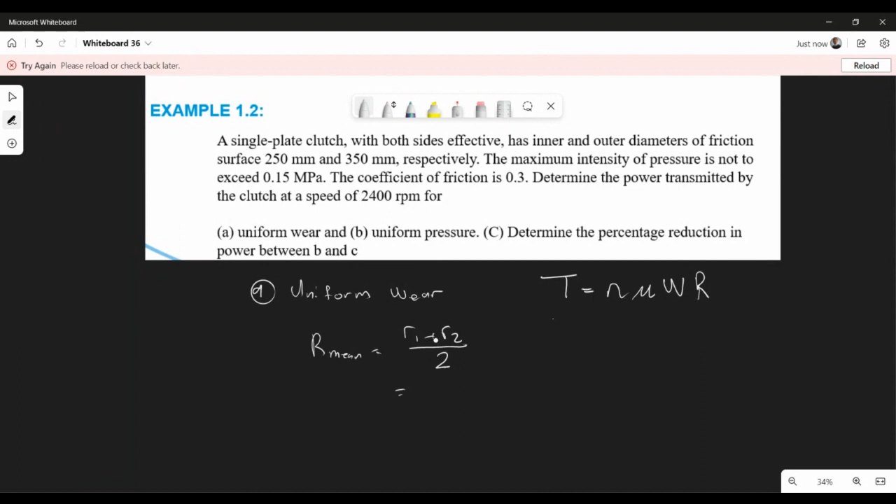Now again, my general formula - I always remember it's N times mu times W times R. And like I said, these two, W and R, change depending on which theory you're using. So for uniform wear, I'll start with the radius. R mean will be R1 plus R2 divided by 2 - straightforward kind of thing, you take the radiuses divided by 2. They're not too stringent on how they find the mean radius here.

So in this case you've got 0.35 and 0.25, so it's 0.175 plus 0.125, divide that by 2 to get that mean radius. I will be giving you the formulas, however you need to make sure you know what to use for what - that's kind of stock standard here.

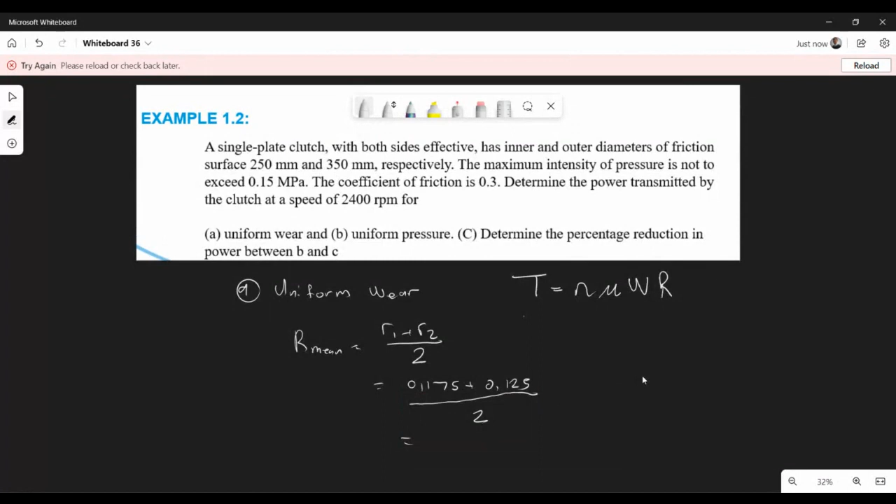So I'll wait on you for my mean radius, and I'll do uniform pressure over here - don't worry, so you can have a look and compare both. So can I get that value? Thank you, 0.15 meters, right? Make sure your value is always accompanied by an SI unit - of utmost importance, right?

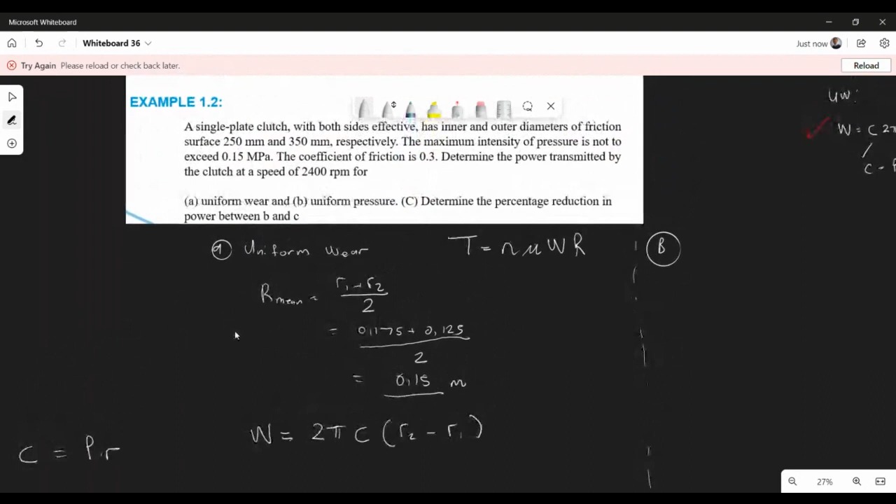So for your uniform wear, your axial thrust is 2 pi C, R2 minus R1 - in your textbook it's there somewhere, the equation is there for you. Okay, so like I said, we have to find C, and C is P times R, right? So this P value they give you there - I like to know which radius do I use to find my C value. Can someone get me C? Get me the answer.

Let me bring the question down for you again. Someone, can you please compute my axial thrust? I'll give you guys 2 minutes to quickly do that. Remember what I said in the previous thing.

Yeah, the words are a bit weird here. Sometimes I get confused between the intensity of pressure, but that's P there. You can't use... so C's unit is Pascal meter, and the pressure itself is just Pascal. So that's the difference between the two.

Okay, so let's get an axial thrust. Let's work this out. What's very important is you have to use the right radius. Let's get the answer. What's that? 1/8. Yep, that's C's value, definitely. Is it 18.75, right? Okay.

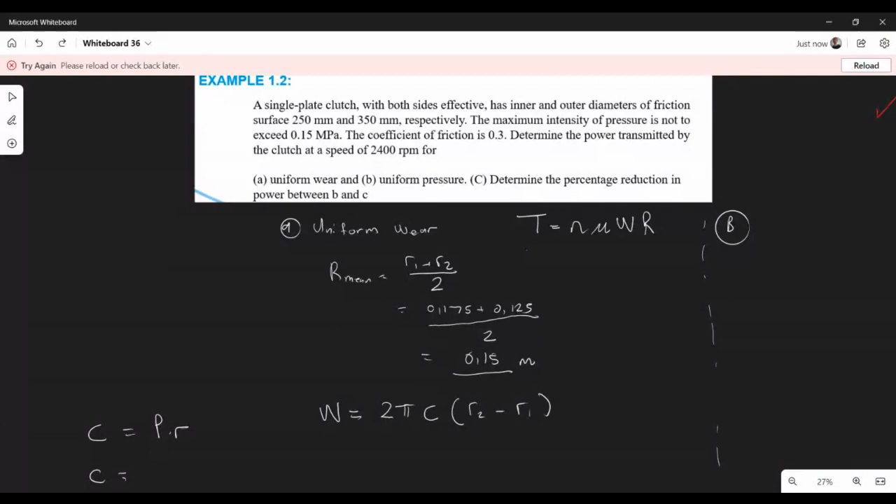Let's get an axial thrust. You guys can figure out how we got that. This will be Newton, sorry, kilopascal meter. Don't have to have a unit for C, just by the way, I don't really mind, I'm just writing it in. How did you guys get this? It's up to you. And now you can calculate your axial thrust.

And that's it. Axial thrust is that force which holds the surfaces together. I'll bring it up again. So what's that axial thrust? Is everyone on the same page? Mr. Gumede, Tsepo, Mr. Asa, are you following?

Mr. Jamini. What's my axial thrust? Are you guys keeping up?

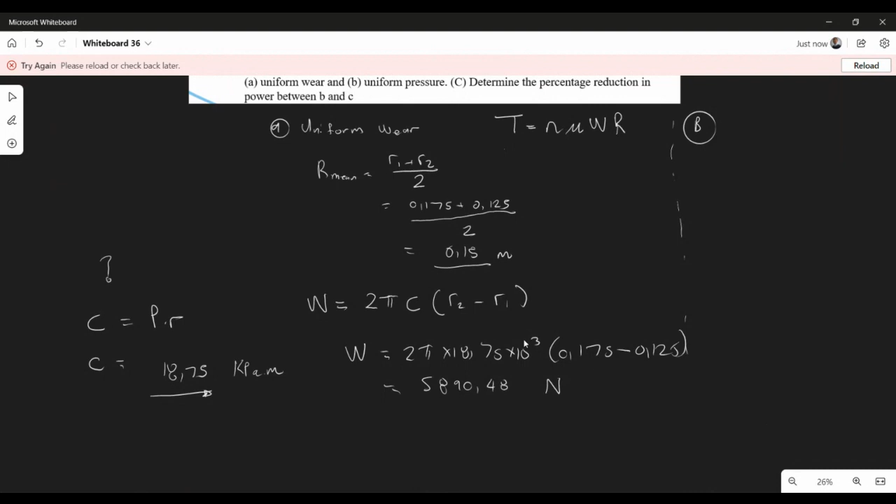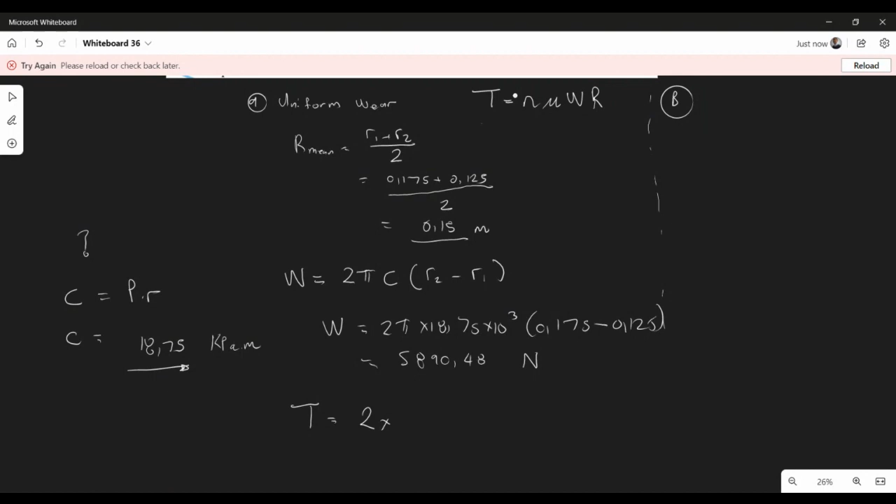And once you've done that, as you can see in that formula over there, we've got W and we've got R now for a uniform wear. Now we can compute the torque. So it's two surfaces, single plate clutch. Again, what is N? N is the number of contact surfaces, flywheel and the clutch plate on the left-hand side, and on the right-hand side is the pressure plate and the clutch plate. Our friction over there is given as 0.3, right?

Now we can times by W, 5890.48, and obviously we can times by our radius, and that's going to be 0.15. Sweet. And we can get our torque. And what is my torque value? Yep, 530.14. You guys will get that? 530.14 Newton meter. Super important.

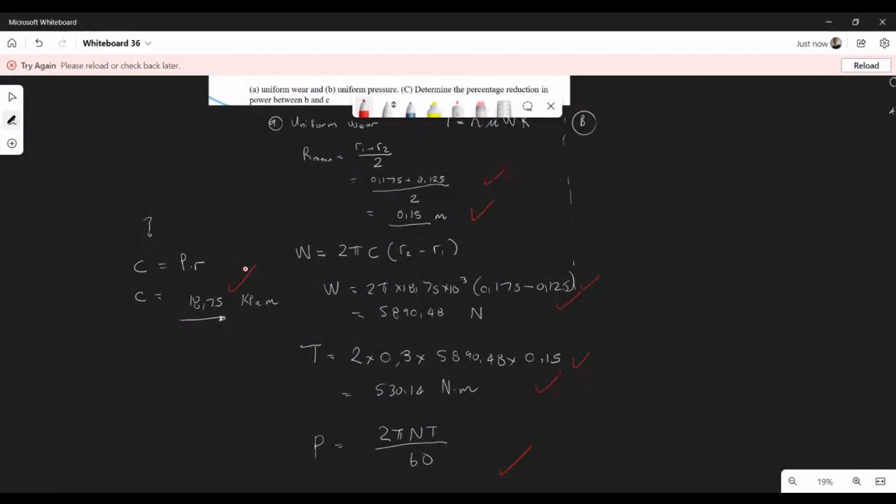And to get our power, it's simple, 2 pi N T over 60. 2 marks for this. Just as an illustration, you guys can figure out that. Let me just show you how your marks look like. You get 2 marks, obviously, for using the right formula there. You get another 2 marks, right formula, another 2 marks, and you probably get 1 mark here. Oh, and you get a mark for this. That's 1, 2, 3, 4, 5, 6, 7, 8. Might even get 10 marks for a question like this. This is the first half of it anyway.

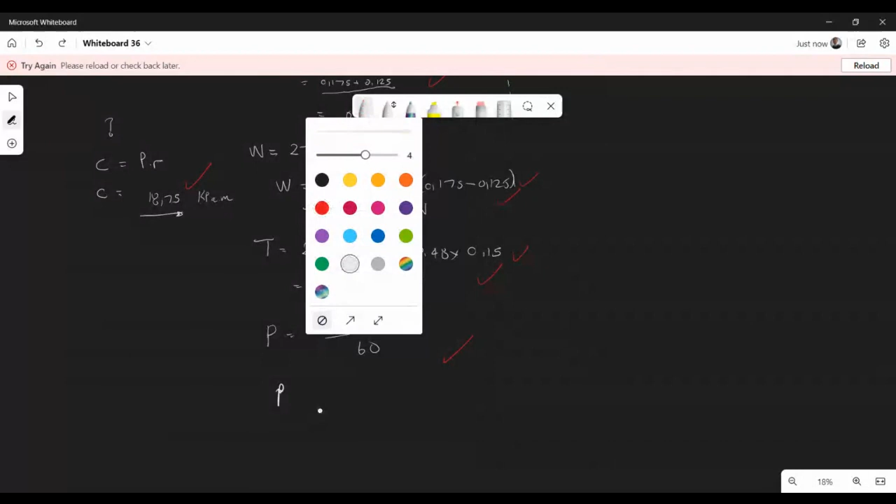So your power will be, excuse me, two pi. They've given us a rotational speed of 2,400 times 530.14 divided by 60. Nice. 133.24. I'm not going to just call it that. Yeah, 133.24 kilowatts.

You probably get 2 marks here actually. I know myself. Okay, so that's roughly how something like that will look. Sometimes you have to use uniform wear and uniform pressure. Guys, are there any questions with this particular thing? Any questions at all? Or is anything confusing you? Do you understand what I did here? This is what I'm doing. The two main theories you basically can apply all over. All what's going to happen is they're going to change, ask you for radiuses, ask you for that.

Any questions, my students? I'll give you 2 minutes for questions and we'll do the uniform pressure theory. Where do you get the formulas? Anything at all. You're free to engage. Why did we use n equals 2? Like I said to you, Mr. Swanepoel, it's about the surfaces. So let me get that back for you again.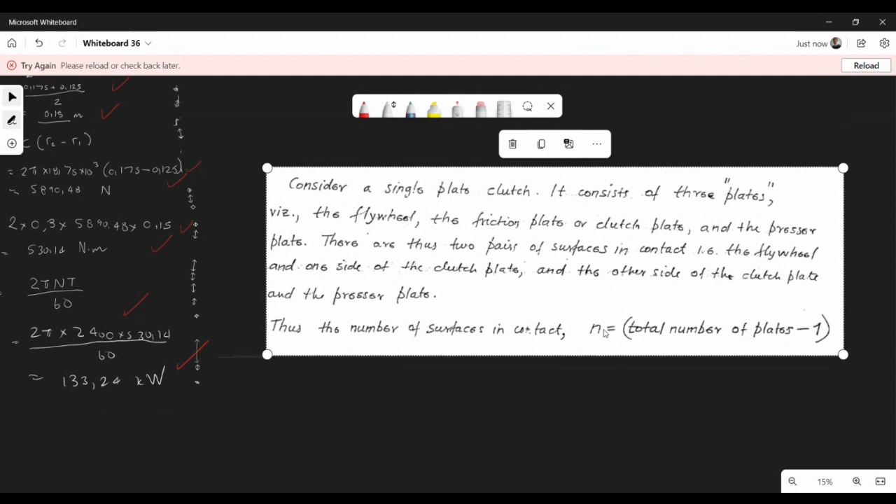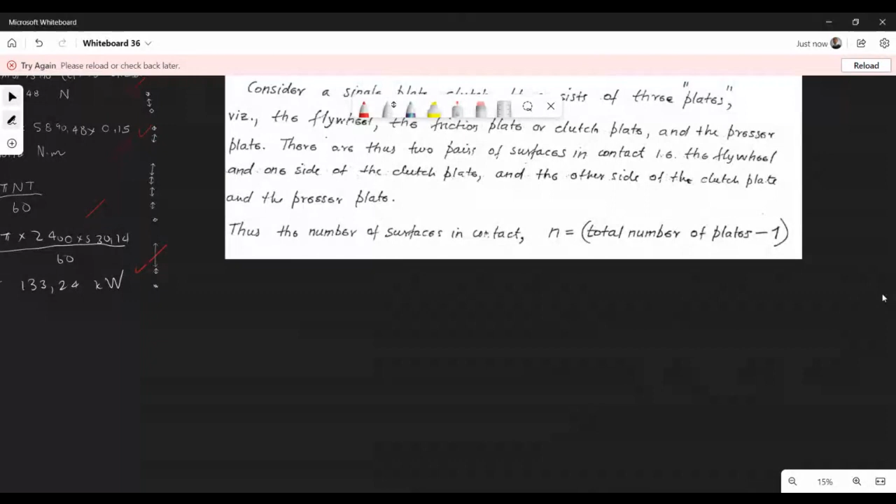For a single plate clutch, n is always equal to 2, and I'll paste that note here so you can see. So as you read here, it says consider a single plate clutch. It consists of 3 plates: the flywheel, the friction plate or clutch plate, and the pressure plate. And there are two pairs of surfaces in contact: the flywheel on the one side of the clutch, and the other side is the clutch plate and the pressure plate. So to find the number of contact surfaces, essentially it's the number of plates minus 1. Remember, there's 2 sides when you're transmitting the torque, basically, if you think about it, not just the one. That's why we use two frictional surfaces.

You got it? Write down this formula for yourself.

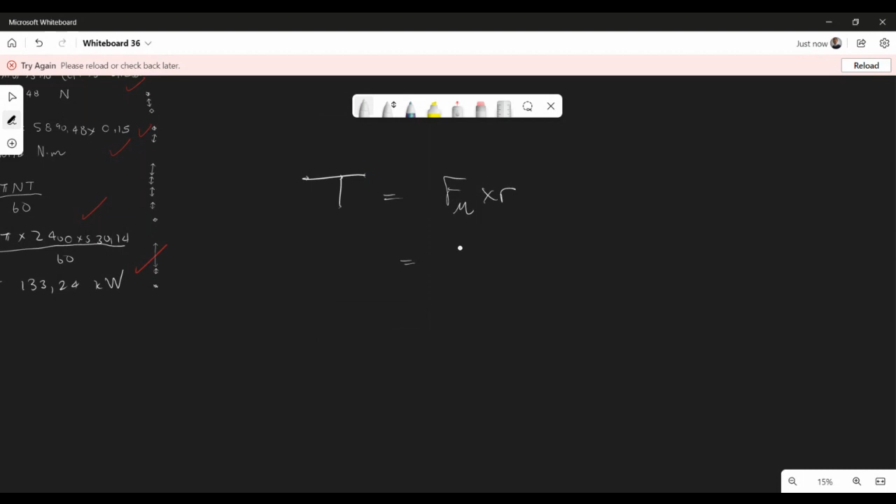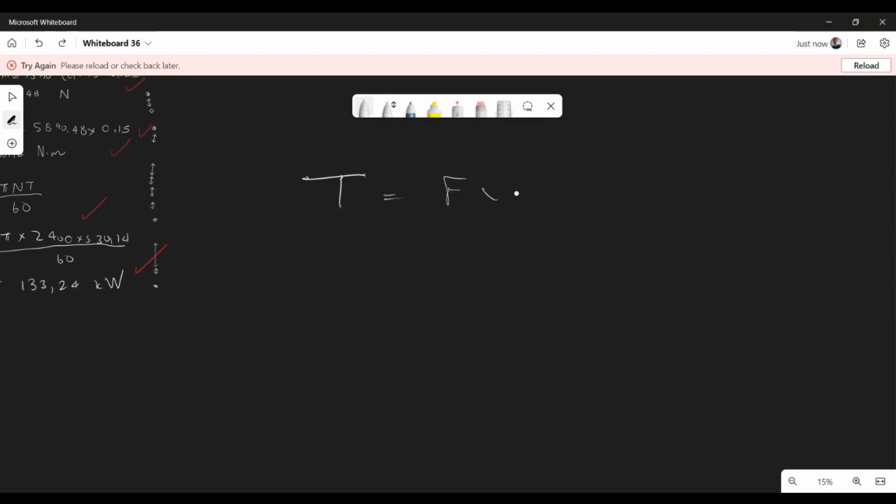Any other questions, guys? Any questions before we move on? No other questions? Guys, are you sure there's no questions? Mr. Wheeling, do you have something to say? All right, nope, nothing.

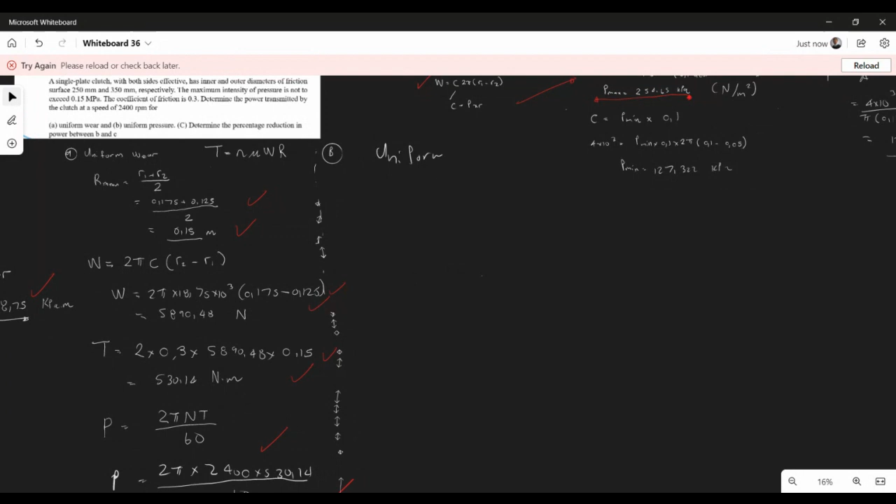Okay, fantastic. So now we look at our next theory, which is the uniform pressure. So again, uniform wear, like I said to you, is for when the clutch is old. So when you're buying a new clutch and installing a new clutch, let's see how much torque will be transmitted.

Not sure why my thing is doing this. Okay. So like I said, it's the same formula. However, we have to now, our W and R essentially changes, right? So our effective mean radius now is 2/3. And if you're curious how they got the formula, there's a whole page explaining this, but it's essentially to do with integration, where they integrate the area. And lucky for you, you're not required to integrate any fancy areas, just apply the formulas. So it's quite easy to remember.

That's the outside radius, what do we call the outside? R1 cubed minus R2 cubed. And then again, R1 squared minus R2 squared. So it's basically outside minus inside times 2 over 3. So can we get that mean radius? So just remember for uniform wear, different type, very basic. For uniform pressure, the effective mean radius is a bit more complicated.

So let's get that uniform. Is everyone happy with that? 0.1514. Mr. Nima, you got it? 0.1514 meters, I think that's correct.

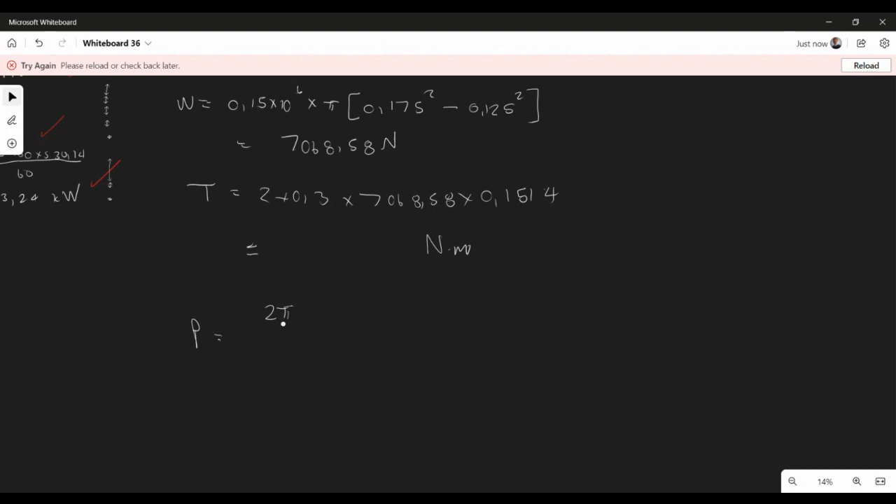So 7068.58 times 0.1514. Just get this right here. And that equals to, what is my torque value? That's Newton meter. And we're expecting a higher torque, like I said, obviously, because the clutch is still fresh, hasn't had a lot of experience yet.

And we should get 642, is that correct? Yes, 642.1, looks legit to me. 642.1 Newton meter. And just compute our power, what do we get there? Let's see, 161.38, you guys get this?

Any questions up until now? Is the concepts being articulated clearly? Are you guys following? Guys, any questions, don't be shy. Mr. Silver, Mr. Gumede, Mr. Tito, Mr. Smulders, you've been quiet. It's 161377.

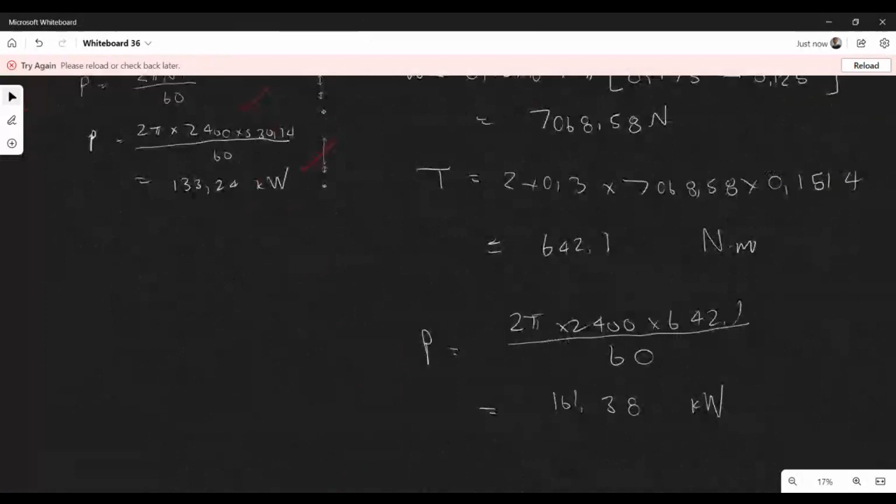Determine the percentage reduction in power between B and C. So assuming you didn't, let's see the importance of maintenance here...

To find the percentage difference, really you just have to take the 161.38 minus the 133.24 and divide that by 133.24. If you do that, you should get a 21.18% difference. So that's what happens if you don't change your clutch, right?

You lose around 20% of the power which you're supposed to initially transmit. So that's part C if you are interested. So guys, that's why maintenance is important. Change those clutches, otherwise things won't operate as they're required to. And I mean, 20% here also talks to a 20% increase in fuel possibly, because let's say, for instance, you're transmitting less power now. Instead of 161, you're only transmitting 133.

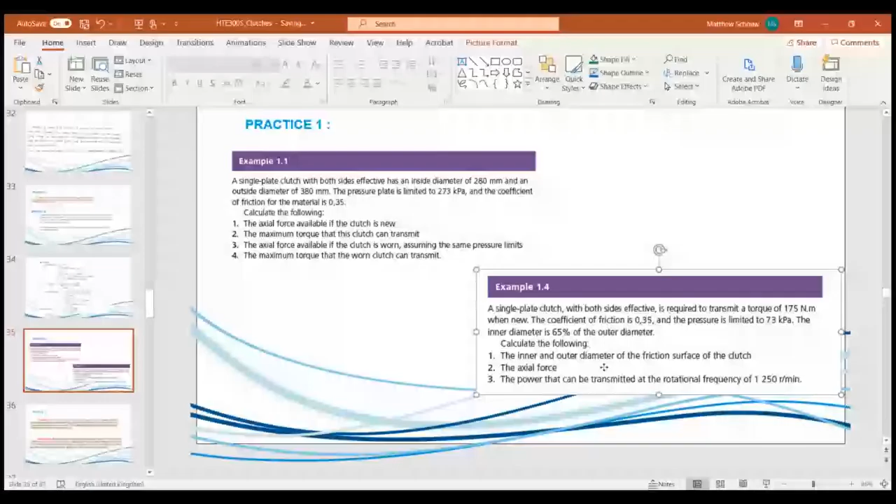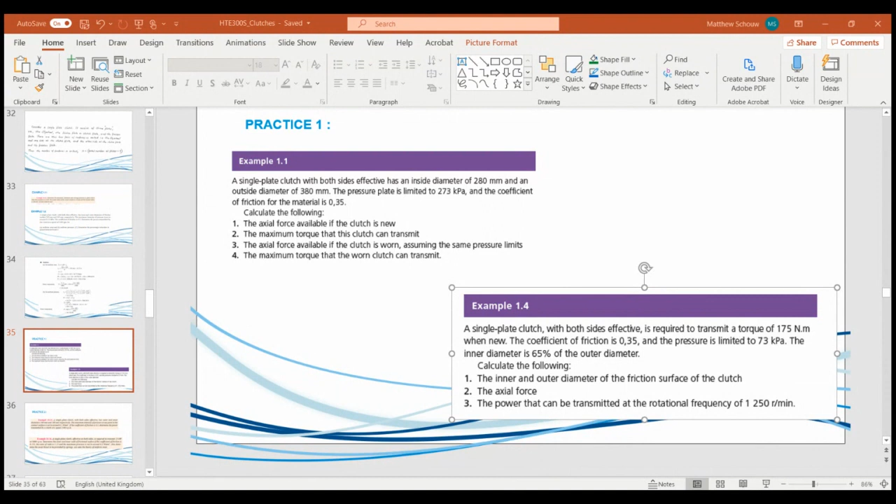I'll just get back to the slides quickly. And what I'll leave you with, just as, and obviously guys, whatever I have is practice on the slides, make sure you do it. All these notes are available for you. Maybe what you can do just as to test yourself while we have our interval, go over these practice slides, and I think the slides are on Blackboard anyway. Everything's on Blackboard. Try and do number one.

If you guys find any problems I can obviously do it, but it's a straightforward thing as well, just giving you an idea of how to do it. And there's also a nice one here, the 1.4. You have all the solutions there already.

And after this we go into the other half of the section, which will be, because it's the interval section, so you guys can, this is all practice problems essentially for you. I just put them here in your face so you can obviously see what's important to practice in your textbook. We're going to go into the springs. When the springs wear out, I'll do one or two problems and then you guys can go practice.

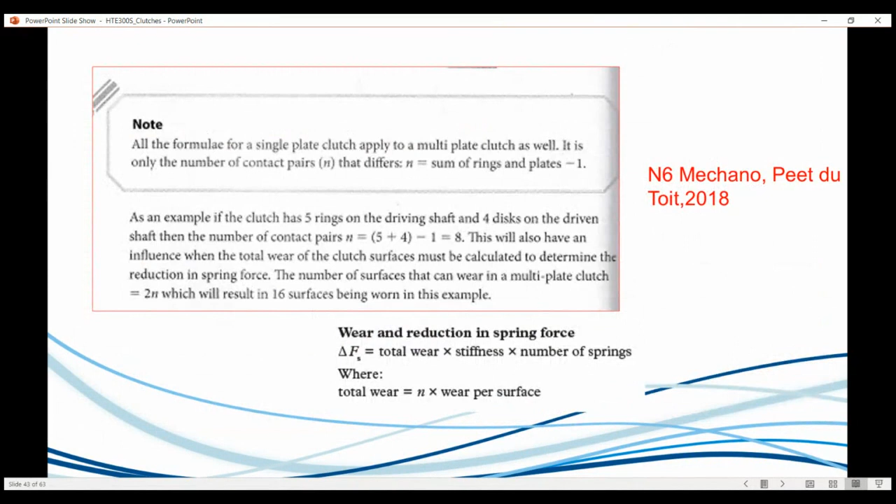And I think from next week we'll start on multi-plate clutches. Yeah, we'll figure that out. Cool, anyway so...

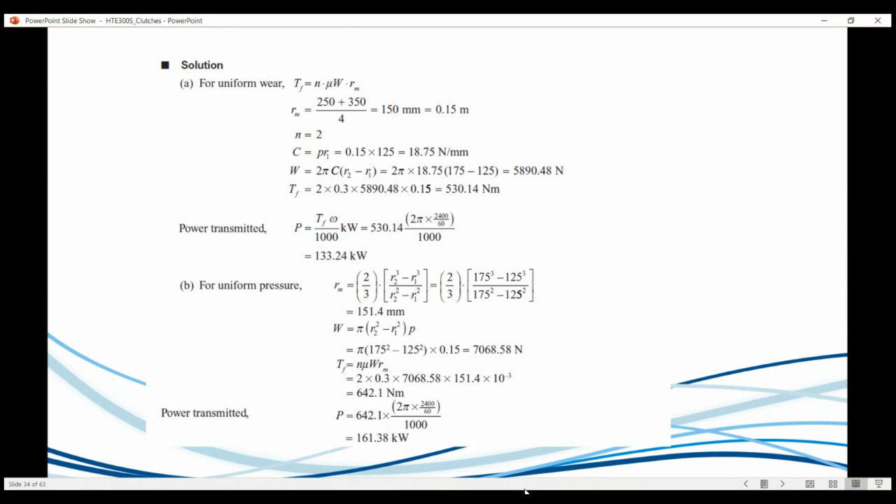Friction is typically very easy marks to actually get. Obviously these are the easier type problems. Other ones you have to kind of work backwards, things like that. But it's nothing too much for you to handle, honestly. But what's key is what's important: know the importance between uniform wear, uniform pressure, and know what things to use.